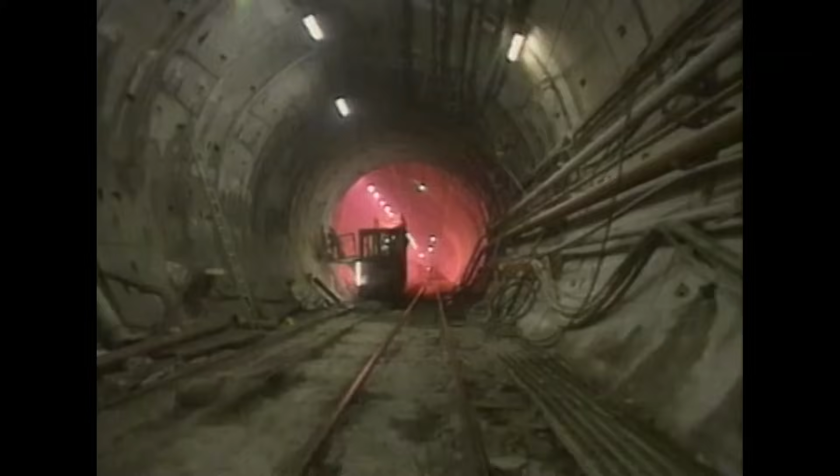Deep beneath the English Channel, one of the most ambitious engineering projects ever attempted is about to begin. Using Earth-eating robotic monsters, 13,000 workers are about to embark upon an epic quest to build the longest undersea railway tunnel in the world. This historic journey will push the limits of technology and human determination to the breaking point. Some workers will not survive. But the creation of the Eurotunnel is a story of triumph, one of this century's greatest superstructures.

Ever since the Ice Age ripped them apart 10,000 years ago, a small finger of ocean, the English Channel, has been the only path between England and Europe. Throughout history, countless lives have been lost trying to cross this treacherous body of water. For centuries, amateur designers and skilled engineers alike have tried and failed to create a safe, permanent link. The first channel tunnel design, if you can call it a design, was in 1802. But at that time, the technology was so limited that really it was science fiction.

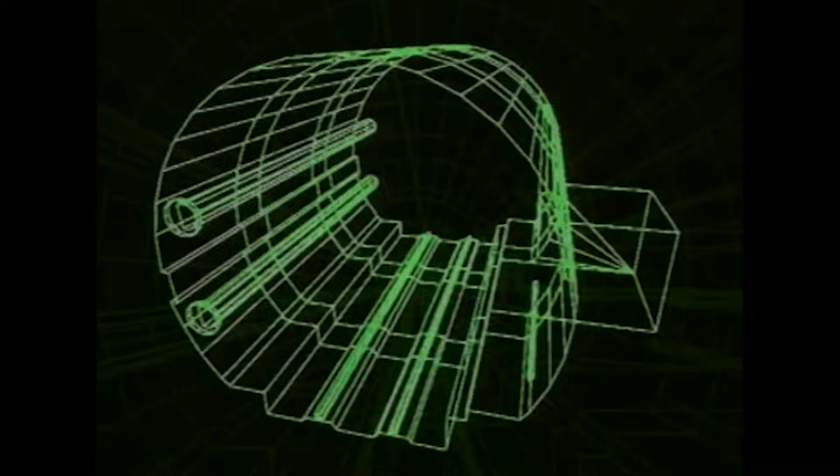But despite the private backing, there was much public opposition, especially on the British side. Some opponents were concerned about the environmental impact of the project, while others didn't want to surrender England's status as a proud island empire. The project's decision-making body, a consortium of 10 companies called Transmanche Link, or TML, is undaunted. They plan a design of 3 parallel tube-like tunnels. When finished, these massive tunnels will form a railway loop between England and France.

Engineers envision a system that will carry thousands of passengers and hundreds of tons of freight each day on this circular 30-minute trip. Of the 35 miles between the French terminal at Calais and the British terminal at Folkestone, 24 will be undersea. No other project has ever attempted to tunnel this far in such a hostile environment. There are lots of problems, technical problems. How will a car move inside the tunnel? What kind of trucks can I transport? You know, all the variety of things.

As the project begins in late 1986, all of these questions remain. But before issues regarding the tunnel's operation can be addressed, the most daunting and obvious problem must first be solved. A machine that can chew through more than 30 miles of solid rock, hundreds of feet below the sea, doesn't exist. It will have to be created.

Thousands of miles from the English Channel, on the outskirts of Seattle, Washington, a solution is being forged of iron and steel. Here at the Robbins Company, a firm specializing in heavy mining and tunneling equipment, the next breed of super machines is being created.

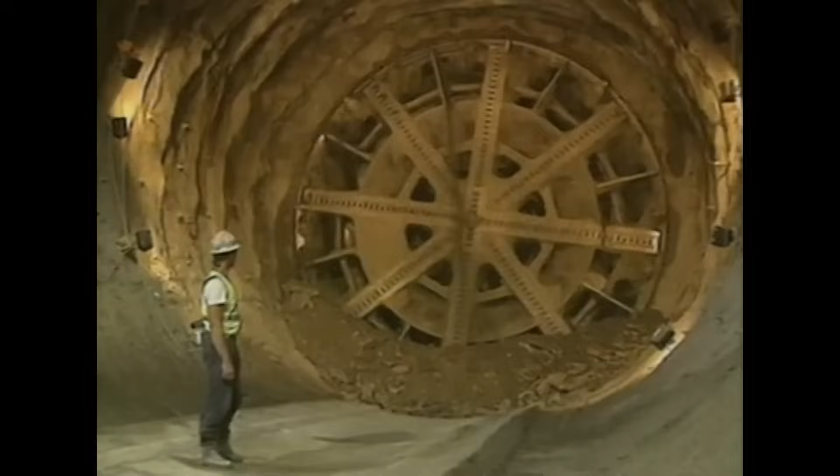When finished, this giant snake-like earth mover will be over 800 feet long and weigh over 1,500 tons. Its rotating head, almost 50 feet in diameter, consists of hundreds of cutting edges made from tungsten carbide, one of the hardest materials known to man. These will be the teeth of this mechanical monster, the cutting force it will use to chew through the earth below the channel.

Pushing the machine forward is a series of powerful hydraulic devices called rams, which will drive the cutting head through the rock. The millions of tons of excess rock it will dig up, called spoil, will be carried out on conveyor belts through the TBM service train attached to the cutting head.

The challenge of carving tunnels through solid rock has always pushed the boundaries of our engineering and manufacturing skill. Even today, it requires a rare balance of brain and brawn.

When large-scale projects like the Los Angeles Aqueduct System were being created in the 1930s, tunneling technology was in its infancy. Today, the Robbins Company will replace blasts of dynamite with a computerized mechanical marvel of which the early pioneers could only dream.

But the danger these modern miners face will also be unparalleled. At its deepest point, the tunnel will be 246 feet below the seabed. During construction, if their boring efforts create a crack in the tunnel or cause a leak, the force of the incoming water will be equivalent to over 7,000 tons of falling weight. Man and machine would be crushed in an instant.

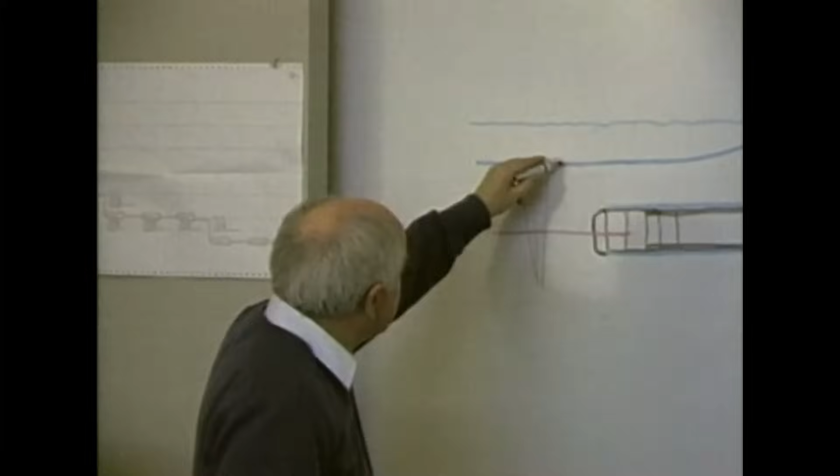At the Robbins Company, frightening scenarios like these must be addressed. Project organizers selected the tunnel's route precisely because it goes through a layer of chalk called marl, which is well suited to their tunneling efforts. It is also the last remnants of the original land bridge that once connected England and France over 10,000 years ago.

While this chalk is ideal for tunneling on the British side, the situation on the French side of the channel is far more treacherous. Here, the seabed is riddled with faults and fissures, conditions that could lead to the deadly accidents engineers must try to prevent.

Of the 11 TBMs that will be created for this mission, the machine that will be used on the French side faces the most difficult job. Working at greater depths, in parts of the seabed that are far less stable than the British side, this undersea giant will have to withstand pressures twice as intense as any tunneling machine has ever experienced.

So engineers decide to create a special TBM that is part boring machine, part submarine. When finished, it will be able to withstand the same amount of undersea pressure as a World War II sub.

Finally, the technology behind the dream of reuniting the European continent seems to be in place. And while the project will ultimately link England and France, the massive construction process will be an international effort. Companies from Germany to Japan will add their technologies to the mix, making the Eurotunnel a truly global undertaking.

While this international force rallies to overcome the physical obstacles of the channel, there are other challenges already mounting, namely the race to complete the tunnel on time and on budget. It is now December 1987. This is where the Eurotunnel begins: 2 huge shafts at Sangatte, France, and Shakespeare Cliff in England.

Too enormous to be delivered to the site as complete machines, the first TBMs are lowered piece by piece into the darkness of the shafts 200 feet below.

Going with them are the workers, the men behind the machines. They too are descending into the unknown, taking the first steps of an epic journey. As the first work begins and the light of day slowly disappears, there is an air of hope, expectation, and much uncertainty.

While extraordinary safety measures have been taken to protect the workers, it remains a dangerous world. And for some, the greatest civil engineering project of the 20th century will carry the ultimate price tag.

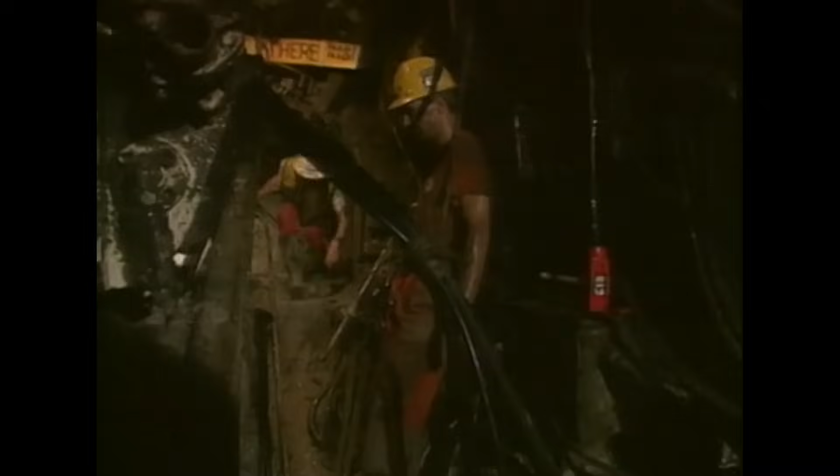A French engineer is trained to make a plan. They can't start work unless they can see what there is to be done, see where their task fits into the whole thing, and see how it's all going to be organized as it goes along. No such thing in the British culture. British culture is to sit down and say, now what have we got to do, chaps? And sort out who's going to do what and set to work.

One of the first problems they face is the assembly of the giant tunnel boring machines, which the workers christen the moles. Even the smallest machine takes months to build and costs several millions of dollars.

The largest of these subterranean titans weighs 1,500 tons. Because of their enormous size and weight, the TBMs must be assembled on site, which in this case is far below the earth. The actual cutting head of the TBM is just the tip of its immense body. Attached to it is the service train, a multi-car train system that carries the hydraulic power to drive the TBMs forward. When connected to the cutting head, each service train is a staggering 850 feet long.

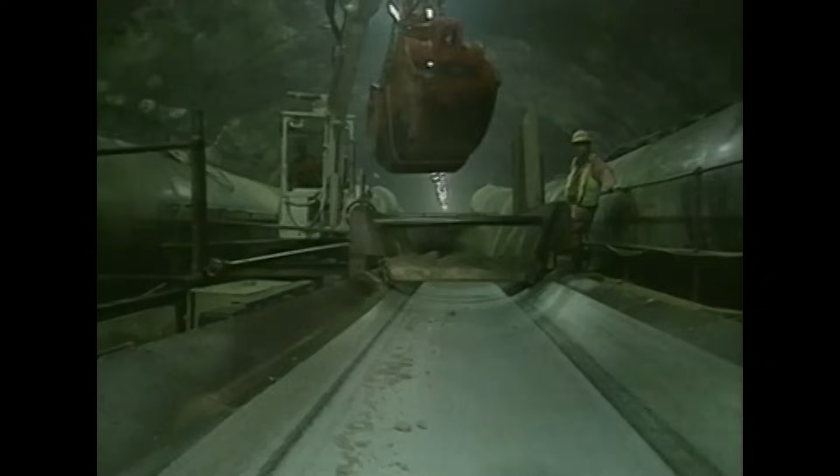One of the service train's main functions is to be a conduit for the removal of millions of tons of rock and sediment these mechanical moles will dig up. The debris will be carried by conveyor belt through the service train to a supply train and back, and finally to disposal facilities in England and France.

The removal of the spoil is a major challenge. When operating at full speed, engineers estimate the TBMs will cut through 750 feet of rock per day, removing 2,400 tons of waste per hour. When the project is finished, the total amount of rock removed would fill a major football stadium 13 times.

But equally important as taking material out of the tunnel is the challenge of getting materials in. One of the most crucial building blocks at this underground work site are the 500,000 concrete slabs which will line the tunnel walls. Because these concrete rings will provide a life-saving barrier between passengers and the churning English Channel above them, their construction is of utmost importance.

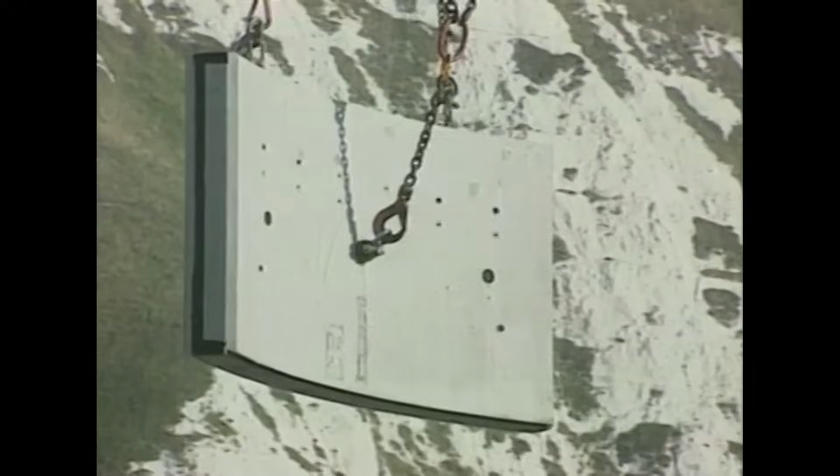Special factories are built in England and France to manufacture these vital sections. Each ring is made of specially reinforced concrete, even stronger than the concrete used in nuclear power plants. It is also reinforced with a framework of steel rods for extra resistance. This is necessary because the savage ocean pressure that will bear down on the tunnel walls is equivalent to 12 atmospheres, or 12 times the pressure we feel on the surface. No human could survive under such immense force.

Once the rings are finished, they are transported by narrow gauge railway to the TBMs in the tunnel and brought up through the service train. Then, a remarkable display of mechanical symmetry takes place.

As the spinning head of the machine claws its way through the rock, operators using giant cranes create the tunnel walls right behind them. After being fitted into place with incredible precision, a gap of only 3/4 of an inch remains between each section. This tiny space is then sealed with a cement grout, and another piece of the tunnel wall is complete. When finished, each ring of the tunnel will weigh 40 tons.

But just as the skeleton of the tunnel is beginning to take shape, the project suddenly seems in danger of falling apart.

It is now 1988. The British and French teams are starting with the middle service tunnel, drilling towards each other to meet in the middle of the channel.

But by May, the giant tunneling machines begin to break down. It was designed to operate at pressures no machine had ever operated before. It was strictly a prototype, so complex that nothing like it had ever been built. It had all kinds of troubles.

Practically everything important on the machine failed or broke at one time or another shortly after we installed it. On the French side, the TBMs are encountering precisely the scenario engineers feared most: hidden faults and fissures in the seabed.

On the other side of these cracks lie the awesome forces of the English Channel. It was technically very difficult because of the water pressure we had to work in, as the machine bored forward right through faults filled with seawater, connected directly to the ocean.

Waterproofing measures designed to protect the TBM's delicate electronic equipment from the seawater fail, stopping the giant machine in its tracks. Then, as engineers scramble to repair the electrical problem, another even larger problem develops.

This is the seal we intend to use. It's a wire brush type seal. The ring of watertight seals providing a life-saving barrier between the TBM and the tunnel walls also begin to fail, again victims of saltwater corrosion.

Engineers need a solution, and fast. The corroded brush-like lining seals are replaced. Then a mixture of paper and special grease is applied to the brushes. When this coating contacts seawater, the paper particles expand and create a permanent, watertight bond between the segments. The TBM is once again waterproof.

But to Robbins Company President Richard Robbins, the tunnel walls seem far more secure than the legal agreement he is working under. Soon he is forced into a desperate personal gamble.

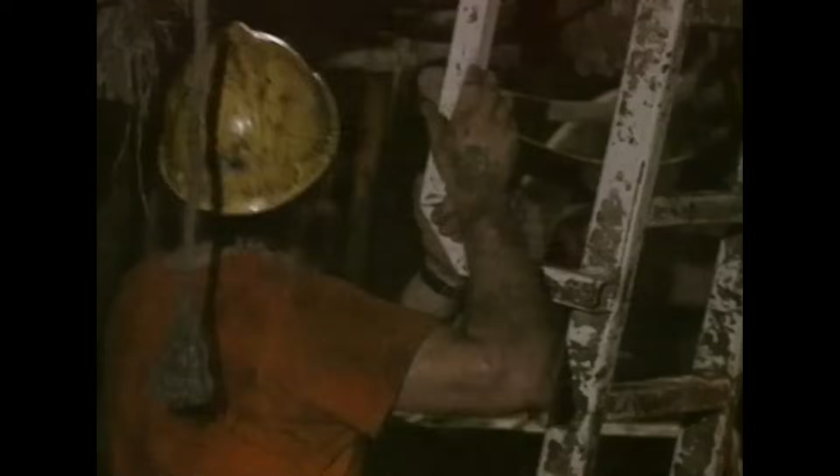The French contractor knew that we had designed a prototype machine, and we didn't really understand exactly what it was going to cost us to build. So he built into the job some interesting incentives: if we met certain project construction points along the tunnel by certain dates, we would earn bonuses.

But it was so bad in the early stages that I was really almost betting the entire company that we would succeed. So it was a big risk for a small company like ours.

But it isn't just contractors like the Robbins Company who are gambling their future. Because the entire project is privately funded, Eurotunnel officials must hit their own deadlines to continue to receive funding. With each new delay, the entire fate of the Eurotunnel lies in the balance.

The one thing we all understood was that if we stopped, it would be very hard to restart. The relationship with the banks, the problems with the contractors, the difficulties with the governments, or just plain organizational difficulties of whatever kind, would very probably bring an end to the project.

Finally, engineers are able to redesign the mechanical flaws in the French TBM and move ahead. But they are now nine months behind schedule. To make up the time, both the British team and the French team must stay on course.

But how will these mole-like machines, tunneling towards each other from opposite directions, maintain such a specific course? They are far too deep below the Earth for high-tech satellite mapping to be of any use. And even the slightest deviation in their course, a fraction of one degree, will mean they fail to meet up under the channel. To remain on track, tunnel engineers use a space-age laser beam guidance system.

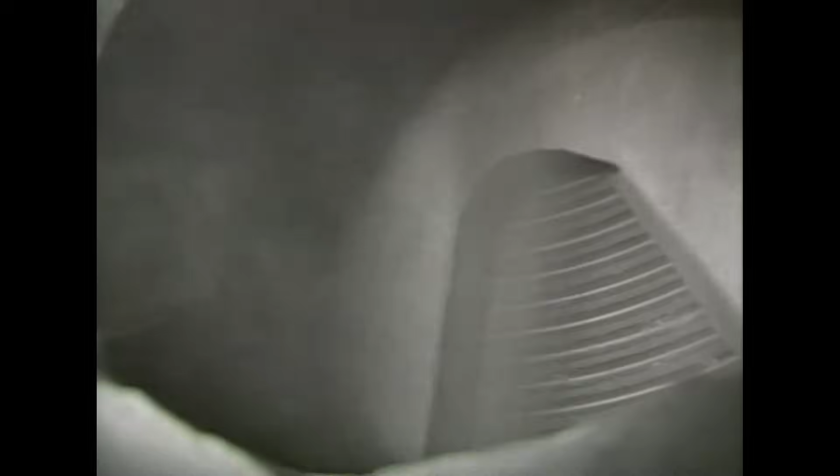At that point, a long steel probe will be sent through to determine if they have been truly on course. If so, more conventional equipment will finish the relatively short distance that remains. But if the two machines are off course, it will mean yet another delay while engineers try and come up with a solution. And with the project's skyrocketing budget under fire, more delays could signal the end of the dream called Eurotunnel.

1989. The year begins on a positive note at the Eurotunnel construction sites. The earlier problems with the French tunnel boring machines seem to be solved. One of the giant TBMs even sets a world tunneling record. For almost 3 years, work on the tunnel has progressed without a fatality.

But in the first days of a new year, a time usually associated with hope and new beginnings, tragedy lies just around the corner. On January 20th, in the dark recesses of this massive cavern, the tunnel claims its first victim. 19-year-old engineer's assistant Andrew McKenna is walking half a mile down the tunnel beside the narrow-gauge railway tracks used by the supply carts. Apparently failing to hear an oncoming train, he is suddenly crushed to death by a locomotive carrying spoil from the site.

Without warning, the stark reality of their dangerous jobs becomes clear to every worker. The tunnel has claimed one of their own. Even with 20th century technology, the job of building tunnels remains extremely hazardous. While workers cope with the loss, they also have to deal with other day-to-day fears brought on by the tunnel.

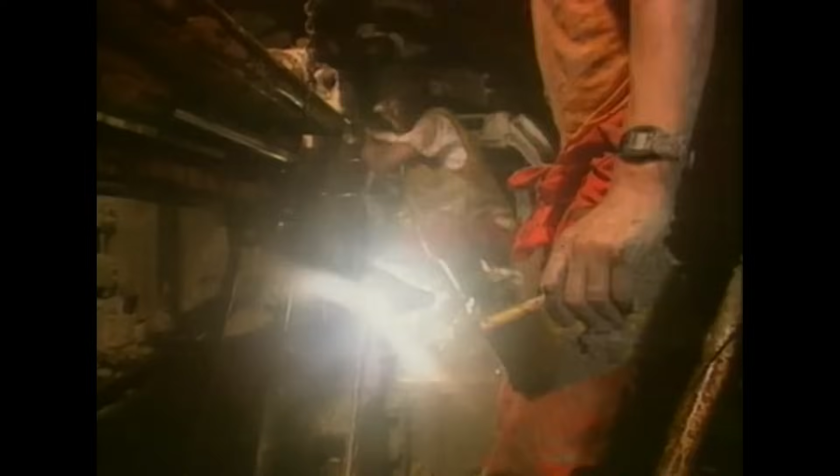Even with the most rigid of safety standards, the death of Andrew McKenna will not be the last tunnel casualty. In all, 12 people will die in this historic and sometimes tragic undertaking. And while the mood of the workers has turned suddenly dark, the tunnel itself remains unchanged. Here, it is always dark. Workers who refer to their machines as moles are left wondering if they are the real underground creatures.

You could be on a day shift where you arrived at work 5 o'clock in the morning and it was pitch black. You could go into a tunnel, work all day in darkness or semi-light, not bright, and then you come out at 5 o'clock at the end of your day and it was dark again. So you could go a whole week without seeing daylight. And that was a very weird experience because it's daytime and yet you never saw it.

As workers move forward in the darkness below ground, above them, work continues on the high-tech trains that will use the system when it's finished. The new service being created exclusively for the Eurotunnel is called Le Shuttle. Tunnel officials say the name is an example of the Anglo-French cooperation that characterizes the project. When finished, Le Shuttle trains will carry passengers in their cars on a continuous loop between the Folkestone terminal in England and the Calais terminal in France.

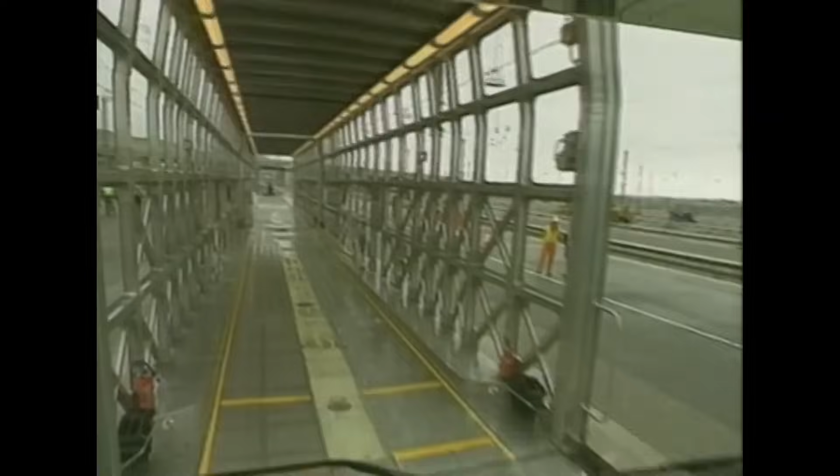Because the transporting of commercial freight will be so important to Eurotunnel's economic success, huge new rail cars are designed to transport heavy trucks. Each freight shuttle, also a service of Le Shuttle, will have 28 carrier wagons like these. Each carrier wagon can accommodate a truck weighing up to 44 tons.

Below the earth, there is no finished railway for any train to travel upon. But that is about to change. It is now October 30th, 1990. There is a new feeling in the air today, a feeling of expectation. After 3 years of tunneling, the British and French TBMs digging the service tunnel, which will run between the two rail tunnels, have arrived at their undersea destination. Facing each other under the English Channel, 100 yards apart, the machines have stopped their digging.

It is strangely quiet. The same question races through each worker's mind. Have they lined up? A probe is sent through. There's a tense silence. Each worker at every level of the project knows it will be a catastrophe if the tunnels are off course. This would be the type of mistake that could fuel the flames of anti-tunnel sentiment into a raging fire. Finally, they get the news. The tunnels line up.

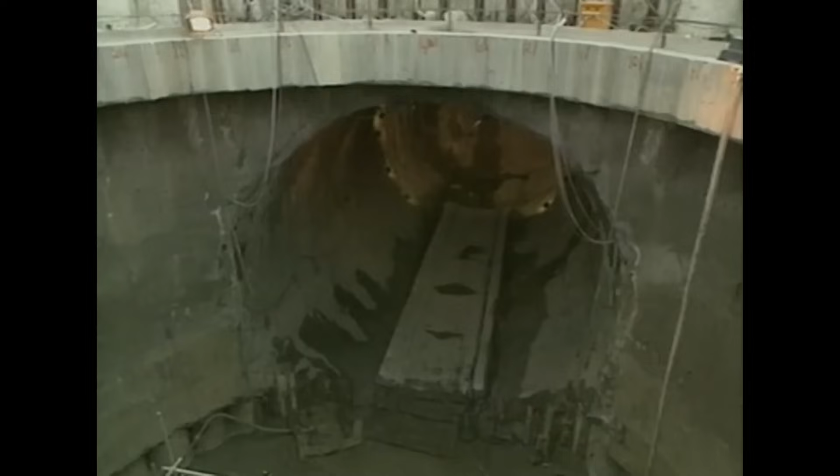As workers return to their jobs with a new sense of accomplishment, a lottery is held to pick one worker from each country to meet in the completed tunnel. Meanwhile, there is the problem of what to do about the last 100 yards. It is too expensive to retrieve both the French and the British machines, so a unique solution is developed. The British aim their machine downward and effectively commit mechanical suicide, burying the high-tech behemoth deep into the earth. This allows the French TBM to move forward and connect with the British side of the tunnel.

December 1st, 1990. Finally, the moment of truth arrives. A thin layer of chalk, essentially a prop for this massive media event, is now all that separates Frenchman Philippe Cozette and Englishman Graham Fagg. With a couple of well-directed jackhammer blasts, a barrier that has stood for 10,000 years is gone. They're through. Hey! There's the handshake we've all been waiting for, Mr. Fagg and Mr. Cozette. One of the most ambitious engineering efforts of the 20th century climaxes with a simple gesture of goodwill. Hundreds of feet below the English Channel, a Frenchman and an Englishman meet through a small hole. For the first time since glaciers ripped them apart thousands of years ago, France and England are once again linked.

The atmosphere was absolutely electric down there. Not only just at the breakthrough, but afterwards. And people were moving. We all felt European. I don't think anybody felt English or French. We were all European at the instant and for the brief hour before we could actually set off back to our respective sides. Amazing scene. Really wouldn't have missed it for anything.

The next few months will hold many more extraordinary moments. The public gets their chance to share in history with the above-ground breakthroughs. First in France, and then in England. When that tunnel broke through, there was a party that would end all parties. It practically went all night. It was at the Windsor Castle on the British side. Fireworks and feasting and about 1,000 guests, and it was really a marvelous party.

What I remember is sitting down there having the feeling there is no more machinery running now. And a feeling, in amongst the most tremendous uproar, popping champagne corks and backslapping and cheering and so on, a feeling of absolute silence, which is the most extraordinary feeling. But amidst the revelry and the silence, the realization begins to sink in that there is still a long way to go. 2 more tunnels need to be created, not to mention the installation of the high-speed railway. Work on the Eurotunnel is far from over.

As the parties celebrating the breakthrough of the service tunnel fade away, efforts to complete the 2 remaining tunnels resume at an energetic pace. The 2 main rail tunnels are called running tunnels. To allow trains to switch from one track to another, massive crossover caverns are carved from the seabed. 40 feet high and over 500 feet long, they are the largest undersea caverns ever created.

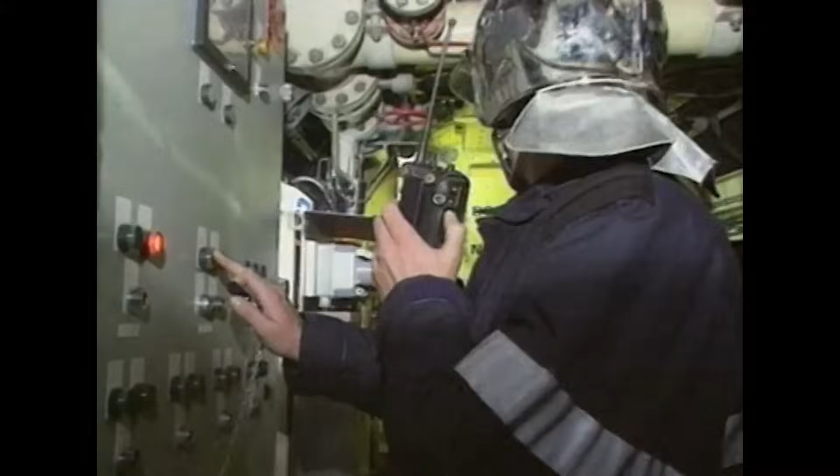But fire isn't the only emergency tunnel officials must prepare for. Terrorist attacks, bomb threats, and even the remote possibility of an earthquake are all scenarios which must be planned for. The evacuation train will be with us in approximately 6 minutes' time. Specially trained security force and evacuation teams are established that constantly rehearse emergency procedures.

While they speak the same language in times of emergency, French and British officials still have different beliefs regarding issues of safety. There are 2 different safety philosophies. The French have a belief in intelligent operators using sophisticated equipment, but in charge of the equipment. The British have a culture of fail-safe computers.

Channel Tunnel, you've got an aggregation of both, so you can be quite sure whichever you think is better, the tunnel's got it. No other tunnel in the world is as safe as this one, with the central service tunnel, the fire supply systems, duplication of power supplies, emergency walkways, and all the procedures that have been put in place to cover every eventuality. But there is one eventuality engineers haven't planned for.

As engineers perform test runs in the tunnels, the friction of the trains is producing an enormous amount of heat, raising temperatures to a scorching 140 degrees Fahrenheit. Scrambling for a solution, engineers create a pipeline filled with chilled, flowing water to keep the heat in the tunnel from accumulating. This cold water acts like a sponge to absorb the tunnel's heat. The water, now very warm, is then pumped to a cooling station on shore, re-chilled, and recirculated once again.

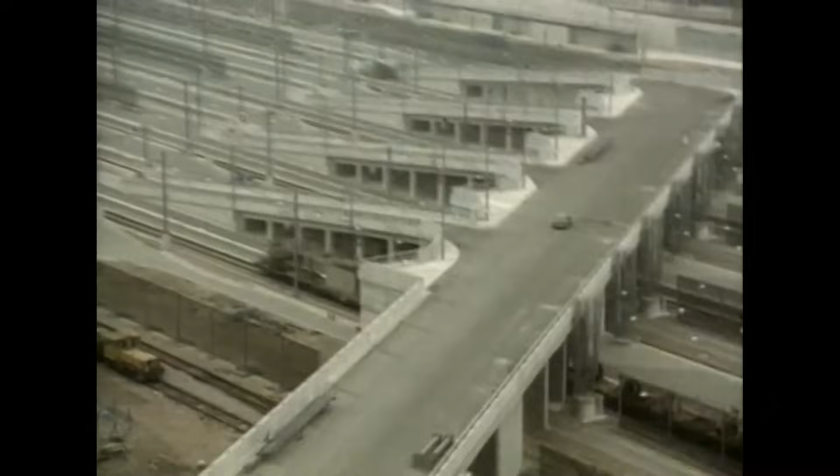Elsewhere, the 2 stations that will serve as Eurotunnel's passenger hubs are beginning to take shape. The massive French terminal at Calais is one of the largest construction projects in the world. Within its sprawling 11-mile perimeter, the Calais station will have 30 miles of roadway and 30 miles of railway track. While the British terminal at Folkestone is tiny in comparison, 5 times smaller than the French station, it will house the nerve center of the entire Eurotunnel system.

Press passage door 5650. You'll press the opening.

Stand by, please. Here in the Folkestone Command Center, operators use state-of-the-art technology to control all of the rail traffic that moves through the tunnel. Sitting behind 3 rows of desks, they can survey a curved wall showing the status of the entire system. This high-tech display is called a mimic board. It shows the position of every train in the tunnel and at the terminals. Door clear, opening now. In the event of a power failure, tunnel control will immediately switch over to the Calais Control Center, which is staffed at all times in case of emergency.

Even the drivers of the shuttle trains will receive a little high-tech help. In this driving simulator, operators practice navigating through the tunnel. In real life, the driver of each shuttle will sit in the front locomotive, while the captain of the train sits in the rear locomotive. The captain, who is ultimately responsible for the safety of the passengers, communicates with the driver by intercom. But the onboard computers also have command status. If the train begins to move too fast, the shuttle brakes will go on automatically.

This is the tunnel that will carry passengers from Britain to France, but today it is a symbol of a united Europe. Just over a month later, on June 28, 1991, more celebrations as a huge crowd gathers for the completion of the Southern Tunnel. The last TBM punches through the remaining wall and comes to a stop.

4 years after the digging began, one of the most difficult engineering challenges in history is now complete. While workers celebrate and drink champagne, the machines finally fall silent. In the long, colorful history of these two countries, this is a singular moment. French or British, project chairman or supply cart driver, for a moment, it doesn't matter.

What is being created here and what has been achieved to date is of enormous value for the future of both our countries and of Europe. Thank you.

In all, over 13,000 workers have labored for more than 6 years. Besides the 3 main undersea tunnels, each over 30 miles long, 9 other smaller access tunnels were also created. The amount of material removed on the British side increased Her Majesty's kingdom by 75 acres. Engineers believe the hard part is over. In fact, contractors like Richard Robbins collect bonuses for finishing ahead of schedule.

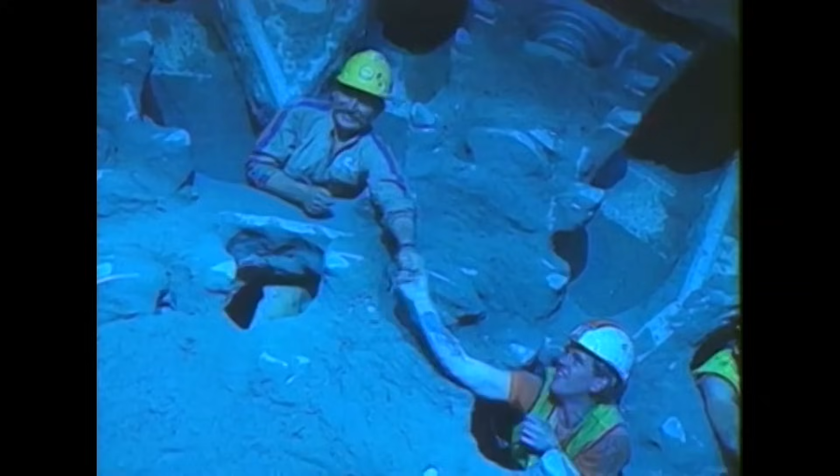But when today's party is over, tomorrow morning will usher in the stark reality of a bloated budget and an uncertain future. To Eurotunnel officials, the hard part may have just begun. With the digging of the Southern Railway Tunnel finished, the 7-year struggle to build the world's longest undersea tunnel nears completion.

The narrow-gauge railway tracks which carried supplies into the tunnels are replaced by a new concrete floor. This will support the wider, standard-gauge railway tracks on which high-speed trains will travel at 100 miles per hour. Over 300,000 rubber shock absorbers are installed to secure 60 miles of track. The powerful locomotives that will pull trains half a mile long 20 times a day are delivered to the terminal at Calais, France. Finally, on May 6, 1994, the grand experiment is about to begin.

After boarding one of the luxury Eurostar trains in London, Her Majesty Queen Elizabeth II arrives in Calais, France. This will be just the first part of an all-day celebration scheduled in both countries. Her Majesty is received by French President François Mitterrand. After a ribbon-cutting ceremony, the Queen and the French President depart in Her Majesty's Rolls-Royce to travel on the shuttle back to England.

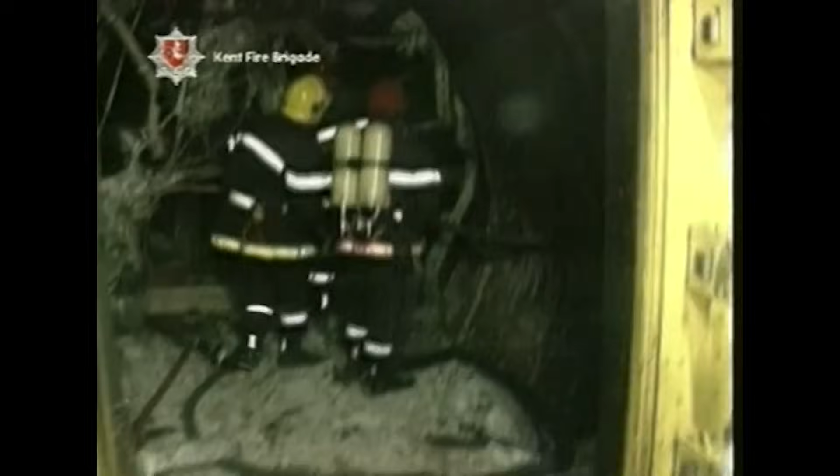1,500 feet of railroad track and 150 feet of the tunnel's concrete lining are wrecked and need to be replaced. The damage caused by this accident, estimated at almost $100 million, makes it one of the costliest rail accidents in history. While no one was seriously injured, public confidence in the tunnel plummets. Eurotunnel officials go on the defensive.

12 hours later, nobody was in hospital. Yet there'd been a 1,500 degree centigrade fire 300 feet away from them. Nobody was in hospital. Now say that about a highway crash, or about a ferry sinking, or about a plane crash. You can't.

17 days later, Eurotunnel officials stage an emergency evacuation exercise designed to reassure the public the tunnel is safe. A drill critics say has more to do with public relations than public safety. Despite this disaster, the northern tunnel reopens to passenger traffic several weeks later. But the badly burned section of the southern rail tunnel is closed for 6 months while the damaged tracks are repaired. Finally, commercial freight traffic resumes on June 15th, almost 7 months after the accident.

As this disaster fades from the headlines, memories of the accident slowly fade with it. But what hasn't gone away is the sacrifice made by over 13,000 men and women who created this architectural marvel. This plaque at England's Shakespeare Cliff pays tribute to the 12 workers who lost their lives working to create the Eurotunnel. Theirs was the ultimate sacrifice.

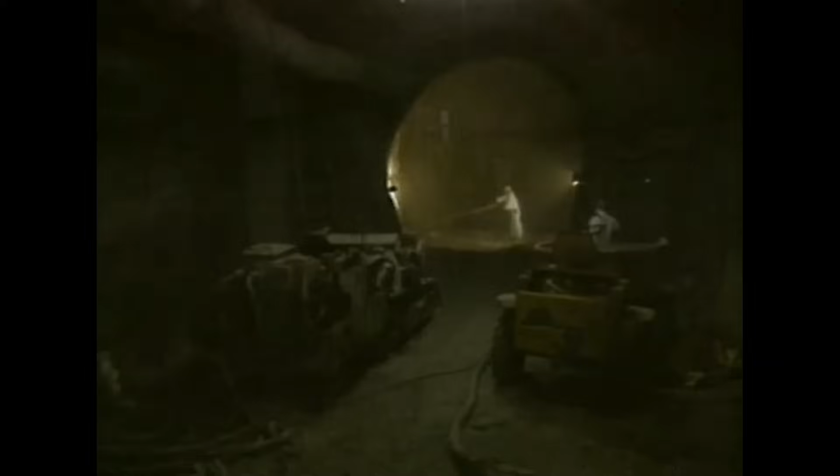The job of being a tunneler, of staring at a mountain or ocean and seeing a way to cross it, has always required a special type of person. A person who can exist without natural light, in suffocating holes, working for long periods of time towards a seemingly impossible goal.

Tunnelers are a special breed of people. They move around the world building holes in the ground. And most of their work is never seen by anybody else, but they do take a pride in building a good tunnel. It remains to be seen whether or not the Eurotunnel will be a financial success.

But officials say immediate financial return was not the sole concern of every investor. The philosophy of the investors was not, curiously, mostly financial. They said it doesn't matter whether we don't see any return. We think the benefits for our children, our grandchildren, are going to be extremely important.

The Folkestone Terminal in England and the Calais Terminal in France are now ports of call to thousands of travelers. This undersea journey, for centuries the subject of scorn and ridicule, now seems routine, the shortest distance between 2 points.

If you were British and you lived here, we're an island, and if you want to get off this island, in the past, the only way is either to get on a boat or to fly. And for the first time ever now, you can take a train. You don't have to change, you don't have to get off. You get on the train in central London, and you get off, and you're suddenly in central Paris, and it's a whole new culture.

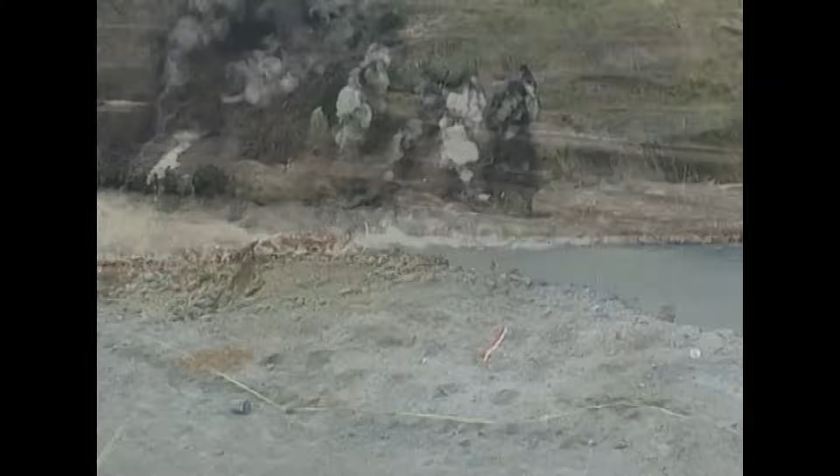Deep in the jungles of Central America, man has battled nature to build an engineering marvel. Its epic story continues to astonish us. Its dimensions defy imagination. Its price, thousands of lives. It's the crossroads of the world's economy. To protect it, America has gone to war. It's the superstructure called the Panama Canal.

December 20th, 1989. Under cover of darkness, 20,000 American troops invade the tiny Central American nation of Panama. As gunfire shatters the stillness of the night, the invaders pursue their prey. General Manuel Noriega, Panama's ruthless dictator and a suspected drug trafficker.

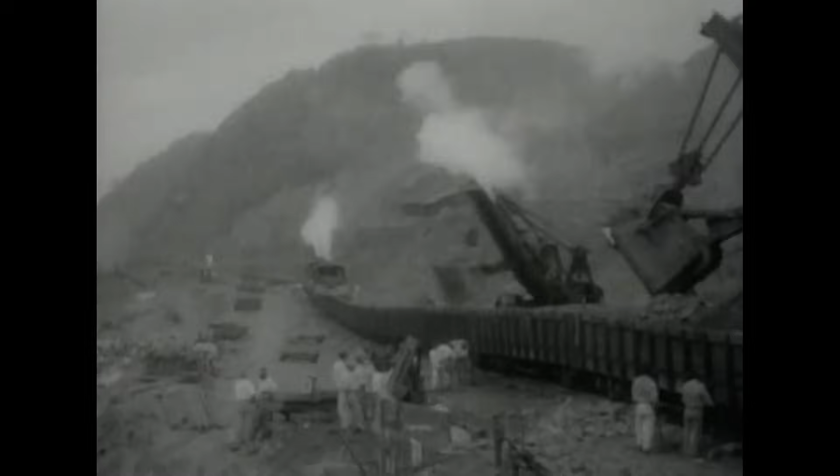The canal was born of a fierce struggle between man and nature, a battle that began at the dawn of the 20th century, when America's greatest engineers took on the biggest challenge of their lives and astonished the world. From 1904 to 1914, 40,000 workers dug and blasted their way through some of the toughest terrain on planet Earth. They dug the deepest ditch, built the largest dam, poured the biggest concrete structures the world had ever seen.

They gave their sweat and they gave their blood. Thousands gave their lives.

The Panama Canal links the Atlantic and Pacific Oceans at the Isthmus of Panama, a mere 50 miles wide, the narrowest point between North and South America.

When a ship enters the canal from the Pacific Ocean, two sets of locks raise it 85 feet above sea level. At this elevation, the ship sails 9 miles through a man-made channel carved from the mountains of the Continental Divide.

Then 23 more miles across the second largest man-made lake on Earth. As it nears the Atlantic, another set of locks lowers it to sea level. By sailing through the Panama Canal, a ship saves nearly 30 days, the time it takes to sail around the tip of South America.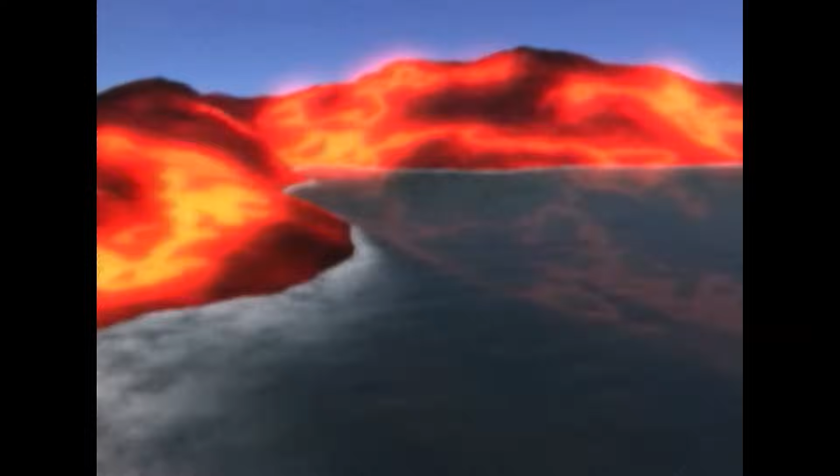Yet 5 million years ago, there was no need for a Panama Canal. The Atlantic and Pacific Oceans freely flowed between North and South America. Then, about 3 million years ago, the ocean floor erupted. 50 miles of volcanic rock arose between the seas. The Isthmus of Panama was born.

Eons later, men dreamed of reopening the ancient path between the oceans. Digging 50 miles seemed seductively easy. But in Panama, it wasn't.

The Isthmus of Panama was one of the most difficult sites to dig a canal in the world. It was geologically unstable, with mountainsides that tended to slip. It was seismically active, and it still is. It has a huge, almost impenetrable jungle covering it, and enormously jumbled varieties of stone and terrain.

At the end of the 19th century, men learned just how formidable a foe the Isthmus of Panama could be. In 1881, France undertook the world's first attempt to dig a Panama Canal.

Confidence was high, and with good reason. In charge was one of the greatest entrepreneurs of his age, Ferdinand de Lesseps. It was de Lesseps who, in 1869, had accomplished one of the most impressive engineering feats of all time: excavating the Suez Canal across Egypt, joining the Mediterranean with the Red Sea.

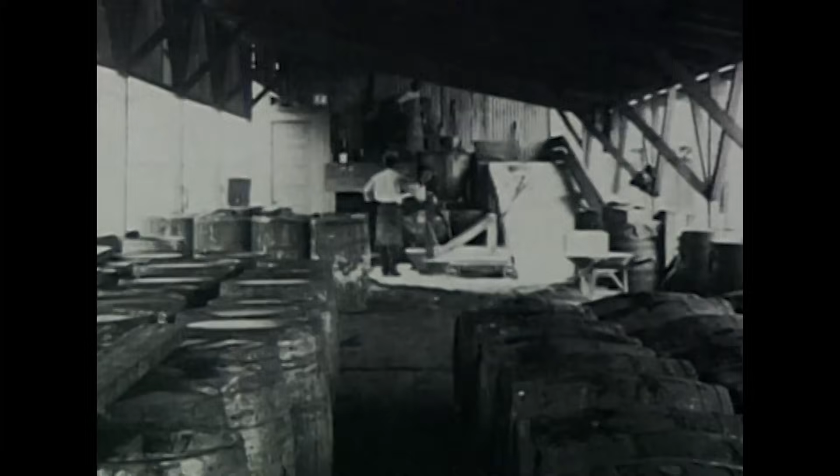In Panama, Gorgas assembled his weapons: 3,000 garbage cans, 4,000 buckets, 1,000 brooms, 5,000 pounds of soap, and 120 tons of insecticide. He sent battalions of workers into the streets, swamps, and jungles of Panama with orders to hit the mosquitoes wherever they lived.

Draining puddles and other mosquito breeding grounds, Gorgas's army sprayed thousands of gallons of oil across ponds and swamps, killing the insect's larvae.

Fumigating entire towns again and again, the cleanup took a year and a half, but by Christmas 1906, yellow fever and malaria had been virtually eliminated. To this day, the Canal Zone remains the most disease-free strip of tropical landscape on Earth.

William C. Gorgas would only be the first of many brilliant men to tackle the challenge of building the Panama Canal. It would be a task that would test the limits of each man's considerable abilities, for even without mosquitoes, Panama remained a formidable geological challenge. To dig their canal, American engineers mounted the biggest and most expensive peacetime endeavor in history. Again and again, they confronted seemingly insurmountable difficulties, inventing new and ingenious ways to overcome them.

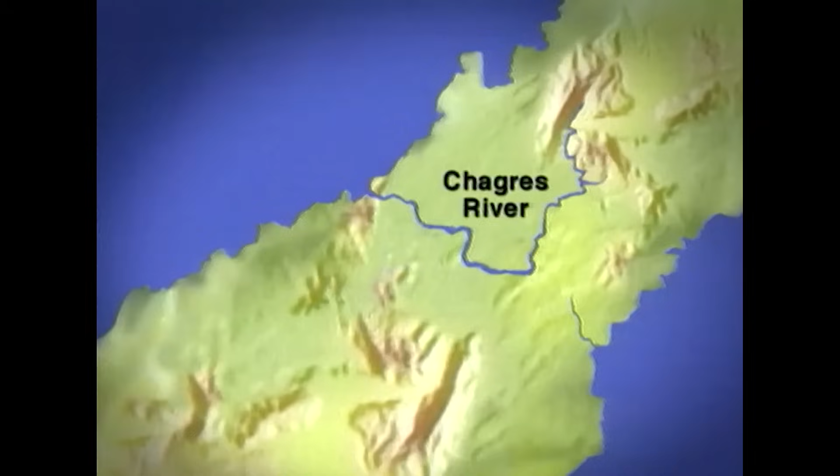When the Americans began their canal in 1904, engineers laid out an ambitious master plan that would take 10 years to complete. That plan called for building 3 gigantic sets of locks, one on the Atlantic and 2 on the Pacific. To supply the canal with its water, engineers would need to dam the Chagres, the largest river in central Panama.

The lake created by the dam would make it unnecessary to dig a canal all the way across Panama, because ships could sail some 23 miles across the lake. But between the lake and the Pacific locks, Panama's rugged backbone would have to be tackled with shovel and pick.

This was the Continental Divide, an unbroken chain of mountains stretching from the Rockies in North America to the Andes in the south. Here, the canal builders would face their first challenge: digging a ditch 9 miles long, 300 feet wide, and 350 feet deep. It would not be easy.

The French had tried to pierce this formidable barrier and failed. The problem was that you didn't have stable hillsides. They looked like rock, but they were so badly fissured and layered in this direction that they kept on slipping. Every time you'd cut something, it's like digging a foundation for a house in mud.

To battle the Continental Divide, America sent an unlikely champion. His name was John Stevens. Stevens had never built a canal. He was a railroad man, famous for laying track and blasting tunnels where no one else could. When he arrived in Panama in 1905, he was 52 years old and had built over 1,000 miles of railroad in the United States, as much as any man alive.

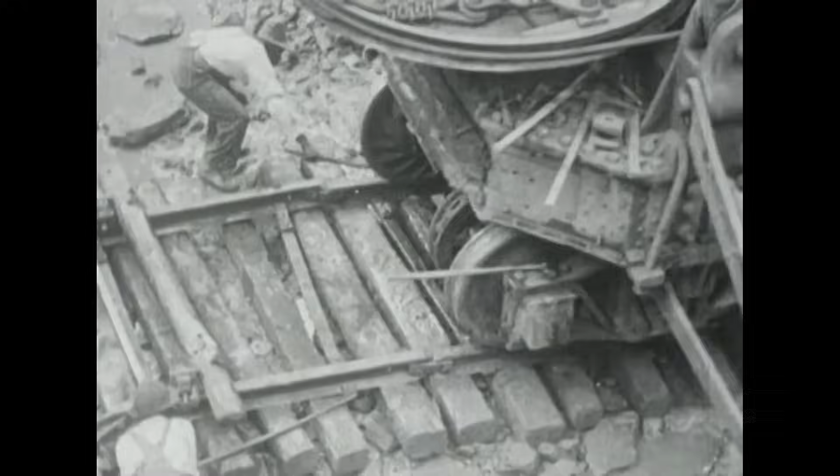John Stevens invented a new device called the track shifter. This simple but effective machine allowed the railroad to follow the digging wherever it went. What he did was design a crane that moved along the track itself, leaning forward and picking up the track in front of it, lifting it, and moving it a couple of feet to the side, then moving along and doing the same thing a little bit further on, and on and on.

But John Stevens didn't stay to execute his brilliant plan of attack. As soon as he had organized the canal excavations, the headstrong railroader abruptly quit. He basically said that the difficult work was in the organization and the design, and that the construction itself was no big deal. Once it became nothing more than just a big construction project, he went elsewhere, off to Russia to find new challenges.

Stevens' departure infuriated President Theodore Roosevelt. The president turned the job of digging the canal over to Army Colonel George W. Goethals. Said Roosevelt, "He can't quit unless I order him to." Second in his class at West Point, Goethals had distinguished himself in the Army Corps of Engineers.

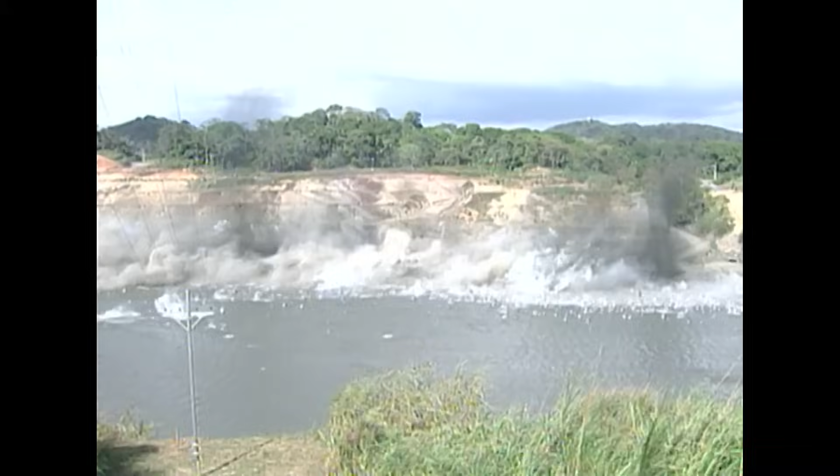But the battle between man and the isthmus continues to this day. Today's canal engineers have new weapons in their war against the ever-shifting earth. Using satellites and global positioning systems, they track earth movements with pinpoint precision. But predicting landslides is not the same as preventing them. Engineers doubt that their battle with Panama will ever end.

Nature has thrown many obstacles in the canal's path. Culebra Cut was only the first. Conquering these challenges would make engineering history.

When American engineers began digging in Panama, they had to decide whether to build a sea level or a lock canal. Because it gets its water from the ocean, a sea level canal must be as deep as sea level. But in the mountains of Panama, sea level is over 500 feet deep. So the Americans rejected the French idea of digging to sea level. They planned to use locks to raise ships 85 feet above the sea.

But building a lock canal created a new problem to be solved. Engineers would have to design and build locks capable of raising ships 85 feet. No canal had ever lifted ships that high.

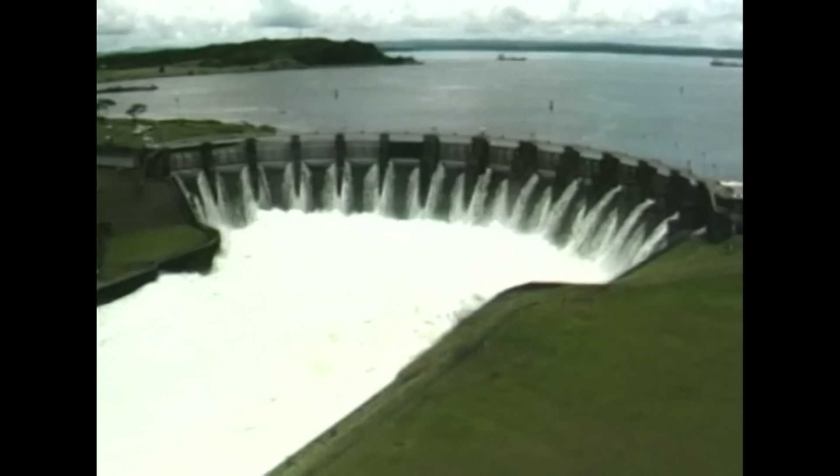Because Gatun Lake is 85 feet above sea level, the force of gravity propels its water downhill toward the sea. But the canal's three sets of locks, Gatun locks on the Atlantic, Pedro Miguel and Miraflores on the Pacific, act like plugs in a gigantic bathtub, preventing the lake's trillions of gallons of water from reaching sea level. To raise and lower vessels, the lock operators need only to open and close a series of valves. Water seeking sea level flows into or out of the chambers, raising or lowering ships as it goes. It takes 26 million gallons of water to raise one ship, and another 26 million to lower it. Enough water to meet the needs of a large city for 2 days.

To handle this enormous amount of water and accommodate the biggest ships afloat, canal engineers would design the largest concrete structures of their time, so massive that no one was sure they could be built. The Panama Canal's locks are so well designed that today's enormous ships can still travel safely through them with only inches to spare. Before any ship ventures into a lock, canal workers tether it to 4 electric locomotives called mules, which travel on either side of the lock on a high-voltage rail. As the ship moves through the lock, a canal pilot on board tells the mule drivers when to reel in or let out cable. Like fishermen playing an enormous marlin, the locomotives keep the ship from hitting the lock walls.

To accommodate the Titanic, the lock chambers would have to be the largest concrete structures in history, each one 110 feet wide and 81 feet tall, higher than a 6-story building. Even today, if stood on its end, a single lock would be the 4th tallest structure on the Manhattan skyline, topped only by the Empire State and Chrysler buildings and the World Trade Center. Only when the locks are drained for repairs can we appreciate their awesome dimensions and understand why those who witnessed their construction compared them to great cathedrals.

Never had concrete been poured on such a massive scale. No one was absolutely sure that it could. The problem with casting concrete in massive amounts is that concrete is an exothermic material. In other words, it gives off heat as it hardens. So the hotter it gets, the more danger there is for the material to crack. And the more volume you have, the more dangerous it gets for things to crack too.

There were other problems. Engineers were unsure exactly what mixture of gravel, sand, and water made for the strongest concrete. If they poured it too late after mixing, it would set improperly. Most difficult of all, building with concrete meant every detail of the lock had to be pre-formed in huge wood and metal molds. The lock chambers would have to be cast like enormous concrete pottery.

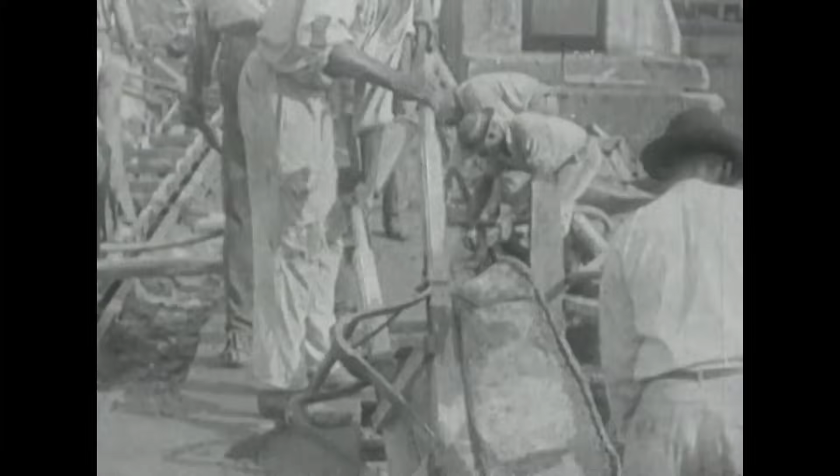To succeed, the canal builders had to do something never done before: pour millions of cubic yards of concrete with absolute precision and perfect timing. It seemed impossible. But for the men who built the Panama Canal, impossible was not an option.

Engineers stretched steel cable between giant movable towers. From the cable hung enormous buckets, each holding 6 tons of freshly mixed concrete. The towers traveled back and forth over the building site, pouring concrete as they went.

The cable cranes were made of 2 very large towers mounted on tracks that could travel along the axis of the Panama Canal. They transported the dirt away, they transported the concrete in. They were very flexible because they could move in 3 dimensions. They could move along the canal axis and across the canal at the same time.

In 2 years using this system, the canal builders poured 4.5 million cubic yards of concrete, a volume equal to building a solid wall 8 feet thick, 12 feet high, and nearly 300 miles long. Today, computers control concrete pouring, but we still build huge concrete structures with the techniques and equipment invented for the Panama Canal. The lock designers topped their concrete pouring triumph with yet another dazzling innovation.

In the age of nuclear power, it's hard to imagine how electricity could have amazed our great-grandparents. But at the beginning of the 20th century, it was the cutting edge of energy technology. Electricity was a brand new energy form. Edison had built the first electric generating plant in 1882, and this was just about 20 to 30 years after that. I don't think that electricity had been used on a building site in quite that extent before.

Unlike steam power, electricity was instant and precise. With a touch of a button, it turned on or off. In the blinking of an eye, it traveled through long wires to start compact motors that drove immense machines. Huge turbines turned by the force of the Chagres River powered 1,500 electric motors which ran the locks of the Panama Canal. An industrial world that ran on steam and animal muscle was deeply impressed. The Panama Canal showed what the new electric power could do.

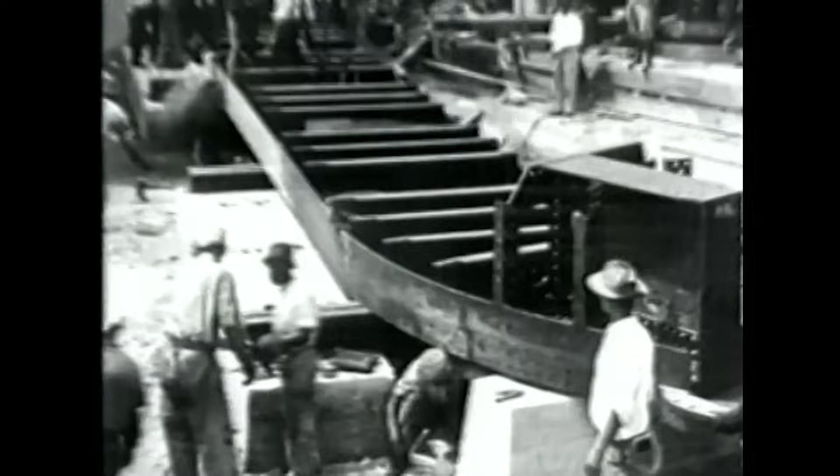With concrete poured and electricity in place, only one challenge remained for the lock builders: the chamber gates. These gates had to be strong enough to hold back millions of gallons of water. To fit the world's largest lock chambers, they had to be the biggest lock gates ever built, as tall as 6-story buildings. To remain watertight, the gates needed to open and close with flawless precision. In short, they had to be engineering miracles. Massively strong, yet light as feathers. And they were.

On dry land, each lock gate weighs 700 tons. In water, it floats. The buoyant hollow frame makes the gate lighter than water. This is a very important feature of the design of the lock gates, because this means that the machinery that is necessary to open and close them doesn't have to move a very heavy, massive steel gate, but really only has to move something that is buoyant in the water.

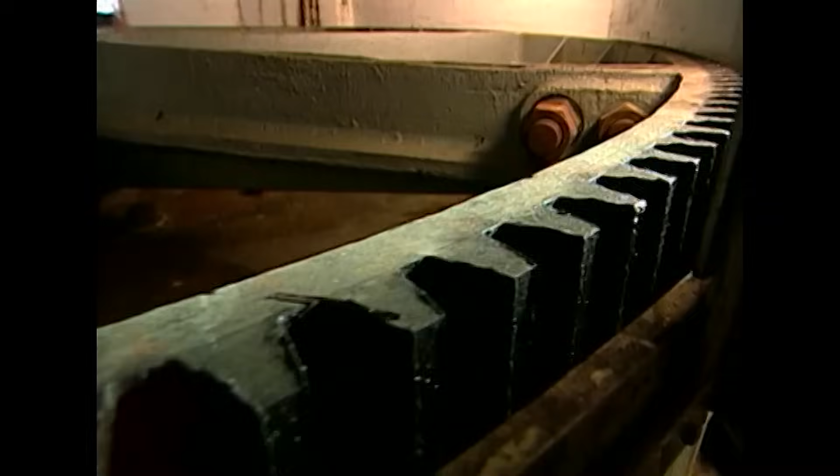Massive steel rods open and close each gate. Moving the rods are huge gear wheels, 20 feet in diameter. Yet incredibly, the whole system runs on a single 40-horsepower electric motor, no more powerful than a motorcycle engine. When the gates were finished, engineers tried opening and closing them in the dry lock chambers at their full weight. One observer noted that each 2 million pound gate swung as easily as an ordinary door.

Gravity was the heart of the locks. Electricity was their nervous system. Engineers gave them a brain, the control board. Today, the original control boards built in 1913 still run the locks. Each board is a tabletop model of the entire lock operation. But unlike a real brain, it cannot make mistakes. As lock operators turn its valve handles, letting water in and out of chambers, opening and closing gates, the entire lock operation unfolds in miniature before their eyes. Everything must happen in correct sequence.

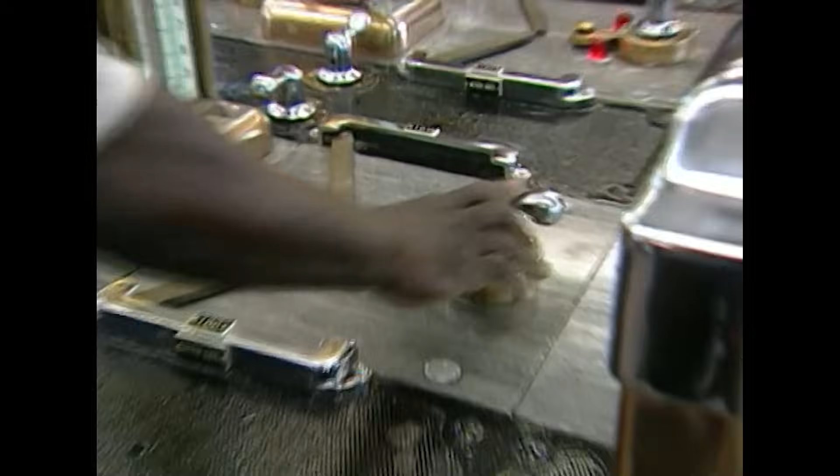Beneath the board, controls are ingeniously interconnected. No one can throw a switch or turn a valve out of order. If they do, the lock operation stops. The lock system had a whole series of fail-safe devices.

It was more like the organization of a military campaign, where each module fit exactly into another organizational module until the whole thing could work. If any piece were left out, if any step were left out in the organization of how to open and shut these gates, how to move ships through the canal, it wouldn't work, it would shut down.

After 4 years of construction, the locks were finished. By then, the Panama Canal was finally nearing completion. In May 1913, 2 steam shovels met nose to nose in Culebra Cut and excavated the last few buckets of soil. The canal was finished. All it needed was water.

On October 10th in Washington, D.C., President Woodrow Wilson pressed a button, setting off an explosion 3,000 miles away in Panama. Hundreds of dynamite charges blew the final yards of earth sky high. Water from Gatun Lake rushed into the Culebra Cut.

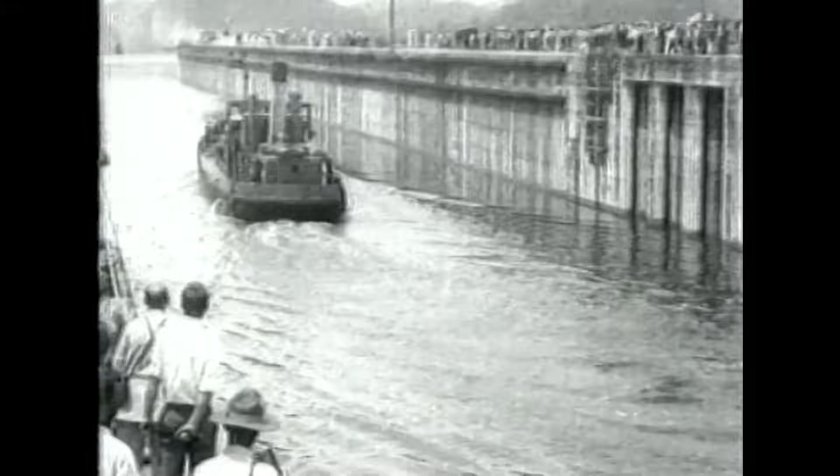But the Panama Canal had been dug as much for strategic military purposes as for commercial shipping reasons. Once finished, it would become one of America's key military assets and one of its most vulnerable targets. On August 15, 1914, the SS Ancon was the first ship to pass through the Panama Canal. A dream hundreds of years old had come to pass, 6 months ahead of schedule and 4% under budget.

But it was a dream with a staggering price. In 10 years, the United States spent $352 million to build the Panama Canal, 5 times more than America had spent on the Louisiana Purchase and all other territorial acquisitions combined. The cost in human lives was no less cheap. More than 5,000 American deaths, nearly 25,000 French. 500 lives lost for every mile.

The canal builders had carried out one of history's greatest construction projects and could only wonder if their accomplishment would stand the test of time. They could not know that within 30 years, the Panama Canal would face a deadly peril. At the end of World War II, the crew of an American warship in the Pacific were astonished to see what appeared to be a prehistoric monster rising from the deep. In fact, it was a Japanese submarine, 400 feet long, the largest underwater vessel of its time.

Examining the subs, American sailors discovered a strange tube and a long metal track. The Japanese explained that the tube was actually an airplane hangar, ingeniously designed to hold seaplanes called Seirans. Like aeronautical origami, the Seirans literally folded into their tubular homes. Once on the surface, the subs would launch their planes by catapulting them off their decks.

But in the early days of the war, aware of the canal's vulnerability, the U.S. military put into action a secret plan of its own. 100 feet under the locks, a maze of tunnels led to Special Items Project 7, SIP-7 for short. SIP-7 was two enormous hydraulic jacks, each weighing 100 tons, supporting a massive slab of steel hidden underground.

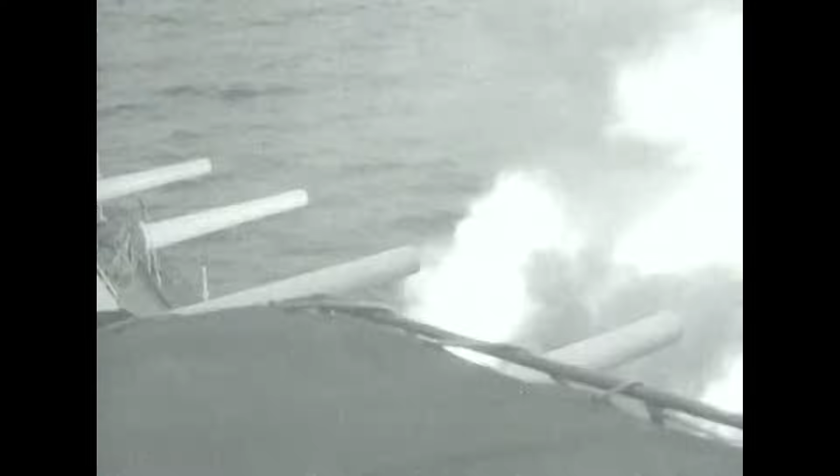This film offers a rare glimpse of SIP-7 in action. Pushed upward by the underground jacks, the huge steel dam rises in a lock, capable of holding back millions of gallons of water if bombs ever shattered the lock gates. World War II ended before Japan could launch its attack against the Panama Canal. Instead, its giant subs ended up as target practice for the U.S. Navy.

Today, the National Air and Space Museum in Washington, D.C. is restoring the last of the Panama Canal bombers. The Seiran aircraft are the only submarine-based airplanes ever designed and put in operation that were intended as an offensive weapon. The Seiran that we have here in this museum is the only one left in the world of this weapon system. And we're very proud to have this because of the threat that it did show against the Panama Canal and what could have been done.

At the close of the 20th century, much has changed at the Panama Canal. The technology of the future works side by side with the innovations of the past.

What's the ship doing? He's going to hit us. Oh, nothing we can do here, Captain. We'll do it.

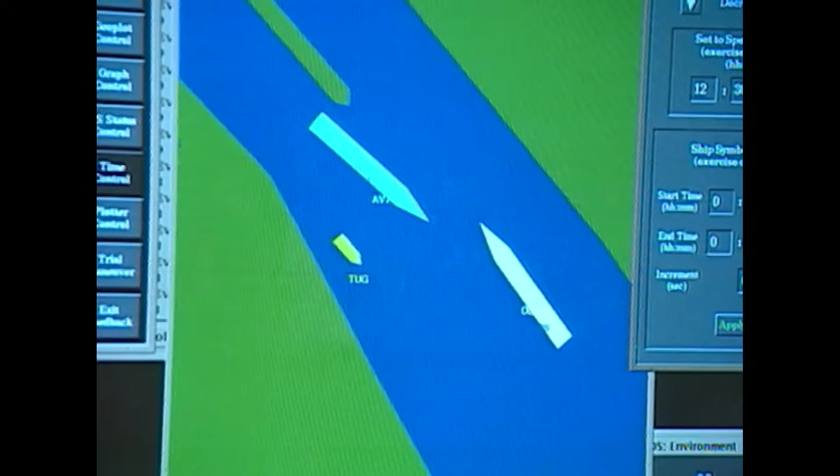Veteran canal pilots use state-of-the-art computer simulations to teach trainees how to avoid catastrophe. It's very important because you have to keep in mind the hydrodynamic effects, the interaction between the two ships. Today, the biggest ships using the canal are called Panamax vessels. Panamax ships are over 950 feet long and over 100 feet wide. The lock chambers are 1,000 feet long and 110 feet wide. There's literally no room for error.

You do a good job entering the locks, and you can see the face of the master right away with a big smile. And if you don't, then you see him looking the other way, and that's perhaps your biggest punishment.

The world is changing too, beyond anything the canal builders could have imagined. The largest of today's supertankers and aircraft carriers are too big for the locks. There's talk of building high-speed railroads across Central America to compete with the canal. But as the year 2000 approaches and the canal passes from American to Panamanian ownership, this superstructure that once astonished the world continues to serve it well.

Since the canal opened in 1914, nearly 800,000 ships have passed through it, carrying over 5 billion tons of cargo. Oil, wheat, computers, automobiles, and vacationers flow perpetually through its 50-mile channel. 15,000 ships a year, 24 hours a day, 7 days a week, 365 days a year. As the 20th century ends, no one expects the Panama Canal to fade into history.

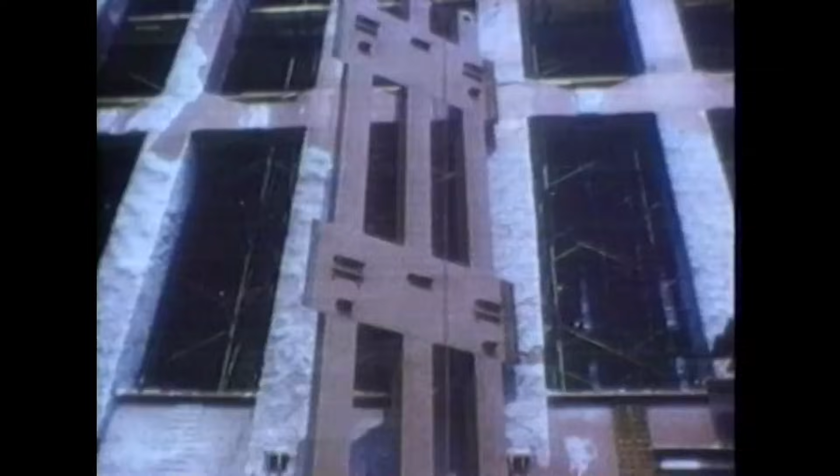Yet in the face of potential disaster, architects continue to design these superstructures higher and higher. It's become a race towards the heavens to lay claim to the title, tallest building in the world. How far and how high will this never-ending race take us? And what engineering marvels keep these superstructures standing?

In Nagoya, Japan, despite continual rainstorms, work progresses on one of the world's largest skyscrapers. The JR Central Towers, still in its infancy, is being built in the middle of a crowded city and on top of a busy train station. Every facet of modern engineering skill is daily put to the test.

When completed, this enormous skyscraper will encompass over 4.5 million square feet. It's about the size of the Pentagon, or larger than one tower of the World Trade Center, the Twin Towers, and one of the largest buildings in Japan, if not the world. Engineers in Nagoya, like many throughout Japan, have no choice but to build up. Land is scarce, and real estate prices are soaring. To meet the needs of a growing population, skyscrapers are the only answer.

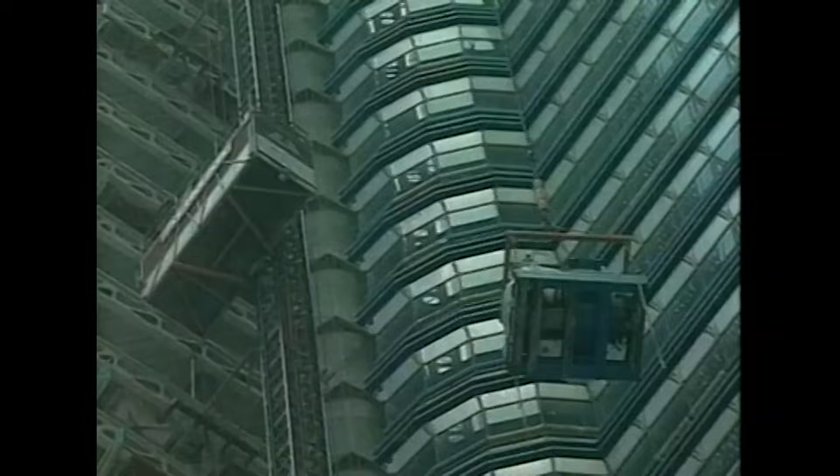Whether built out of need or inspiration, constructing these mammoth skyscrapers relies heavily upon technological advances. But modern science isn't perfect, and tragedy follows when one comes tumbling down.

Unwavering before such catastrophes, engineers continue to build bigger and taller superstructures. Well, I think man has always wanted to get higher and higher. He always climbed the mountain to see beyond. It's also getting up to be taller, to overlook everyone else, or to be recognized or to feel more powerful.

To build these modern-day monoliths, architects and engineers first had to conquer the force of gravity. During the mid-1800s, the only means of vertical transportation, other than climbing stairs, was a rope and pulley system driven by a steam engine. However, the system was too dangerous for passengers since the ropes often broke.

Frustrated, Elisha Otis invented a safety brake that locks the platform to its guides. In 1852, what seems a minor invention paves the way for the modern elevator. Slowly, the public begins to trust the Otis elevator. Upper-level floors become fashionable and profitable as architects quickly adopt this new means of vertical transportation.

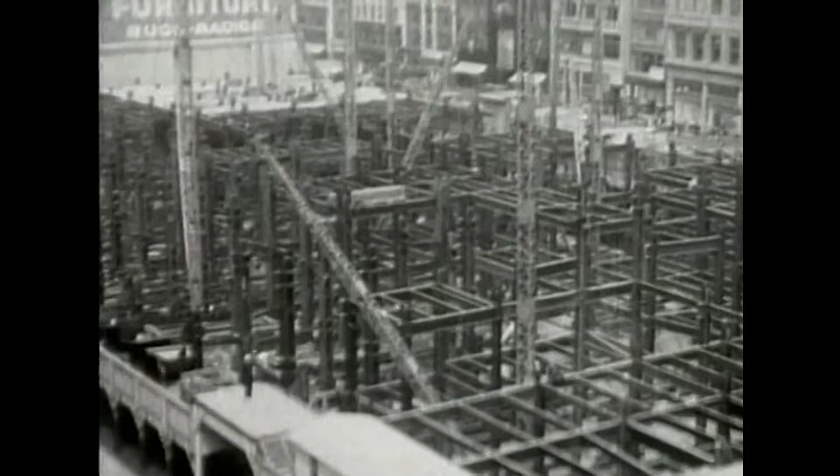And then the weight of that material is held at each floor level rather than passed all the way down 5, 10, 20, 30 stories down to the ground and held at the bottom floor. No, it's all hung off of this very strong structural cage, which is much lighter now because it's out of steel. Because the steel structure bears the majority of the weight, the exterior, or skin of the building, can now be made of much lighter materials, such as glass and aluminum. The result is an explosion of buildings taller than anyone has ever seen.

The limits on masonry buildings were about 200 to 250 feet, which is equivalent to about 20 stories. With the advent of the separation of the two systems, the skeleton from the skin, we became capable of pushing higher and much higher, up to 50, 70, 80, or the Empire State Building type, up to 100. For over 100 years, the steel cage structure has enabled engineers to build skyscrapers higher and higher. It's the backbone of every tall building's design, even the 800-foot JR Central Towers in Nagoya.

The skyscraper is made up of 3 steel cages. One forms the base of the building, while 2 rise up within each tower. Without this technology, skyscrapers rising above 20 stories wouldn't be possible. In Malaysia, over 26,000 tons of steel and 160,000 cubic meters of concrete have been used in the framing of the Twin Towers. These 88-story steel and concrete skeletons will help the Petronas Towers claim the title, tallest building in the world.

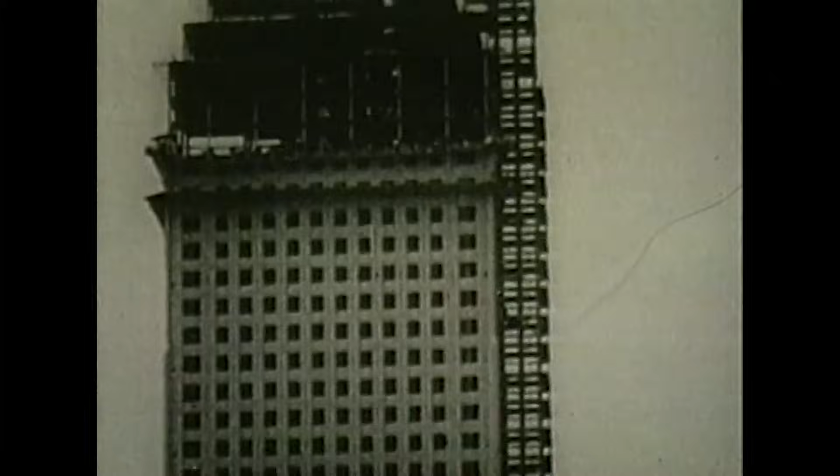Higher and higher they rise. But at what altitude do skyscrapers become too dangerous? Over 50 years ago, a deadly incident magnified these risks. In 1945, the tallest building in the world is New York's Empire State Building, rising an incredible 1,250 feet. Built in just over 13 months, its claim as the tallest skyscraper will last nearly 40 years. Perhaps this building's greatest achievement is not its long stay at the top, but its jarring reminder of the dangers of building so high.

The Empire State Building and all New York City were wrapped in fog as a B-25 Mitchell bomber trying to reach a nearby airport crashed into the tallest structure in the world. Although the pilot and 13 others died, the building sustained little damage and was open for business 2 days later. Its ability to survive a collision with a World War II bomber seemed to validate modern engineering technology. Soon, a skyscraper building boom swept across the United States. 29 years later, the Sears Tower is built 1,454 feet above Chicago, becoming the tallest skyscraper in the world.

While skyscraper construction within the United States has steadily declined since the early 1970s, the JR Central Towers and the Petronas Towers are at the forefront of a building boom along the Pacific Rim. The competition is as fierce as ever. You built a skyscraper, they're taller and taller. Some of them make absolutely no economic sense, but they're being built nonetheless.

Only time will tell if this architectural pursuit will prove deadly. In New York, to avoid future collisions, airplanes were simply rerouted. But the engineers of the JR Central Towers and the Petronas Towers are threatened by unavoidable forces.

They're building skyscrapers in one of the most seismic active regions in the world, where the threat of a major earthquake is constant.

Relying on the innovative designs that enabled the Sears Tower and the Empire State Building to reach such monumental heights won't help. They weren't designed with earthquakes in mind. How safe will these new structures be when a violent earthquake shakes their very foundations?

As construction continues on the JR Central Towers, the Petronas Towers nears completion. Engineers of both buildings hope their state-of-the-art technology will pass the test. If it fails, these latest additions to the tallest buildings in the world could come tumbling down. Modern building design will be pushed to its limits when Mother Nature strikes.

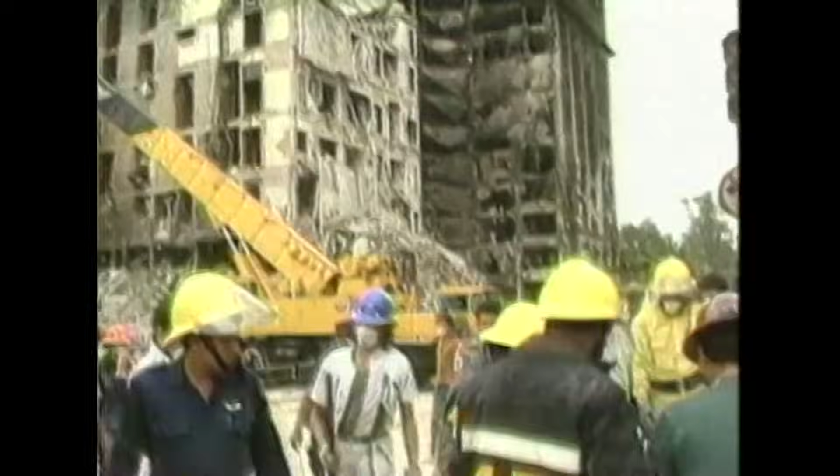More than 10,000 people are killed, and over 100,000 are left homeless as the quake damages nearly 3,000 structures. 400 totally collapse. And for the city's towering skyscrapers, once a symbol of modern Mexico, this is the most devastating quake ever.

The ground was actually moving back and forth for a minute and a half or so, about like this. It's just sort of a gentle motion back and forth, and certainly most buildings, if you were in them, you'd get a little seasick, but you wouldn't feel very much. That's not a very violent motion, unless you happen to be a tall building.

During the 90 seconds of shaking in Mexico City, some skyscrapers swayed 6 feet, 3 times farther than what is considered safe. Neighboring buildings slammed into each other, causing major damage.

10 years later, a small office in the Japanese city of Kobe is tossed upside down, just one of the many casualties in a town devastated by a 7.2 earthquake. Over 100,000 buildings are destroyed, and another 80,000 are severely damaged.

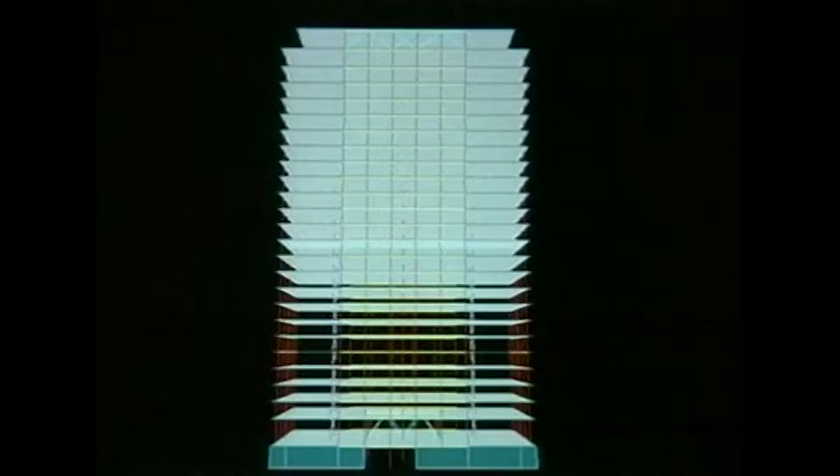Using computers to simulate the shaking a building sustains during a major earthquake, researchers discovered that strengthening a skyscraper's foundation may prevent these structural failures. In Nagoya, Japan, only 140 miles from Kobe, the engineers of the JR Central Towers are putting this latest research to the test.

Four stories below the proposed lobby, a vast digging campaign is underway. In this subterranean cavern, architect Paul Katz hopes to build the strongest foundation ever constructed for a skyscraper.

To anchor the building to the foundation, engineers drive 125-foot-high steel beams 60 feet into the bedrock. Eventually, these columns will be encased in steel reinforcement bars and concrete. This will become the base frame of the building and bear the majority of its weight.

You can see here the tremendous amount of reinforcement that is needed not only to carry the weight of the building, but this is where all the forces of the building come down. And in earthquakes, this is the part of the building that resists the lateral shaking that an earthquake will affect on a huge structure like this.

As an added precaution, engineers will fill the entire cavern with over 1.5 million cubic feet of concrete, creating what is called a mat slab foundation. What we're seeing in the excavation here will entirely be filled with concrete, 5.5 meters in height, which in a way the whole building then floats on, helping support the building from tilting and unifying the entire structure.

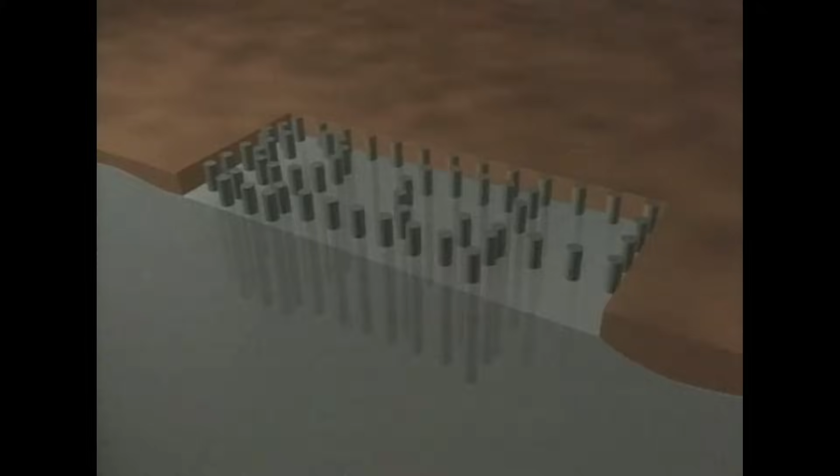For a mat slab foundation to work, steel piles must be anchored in solid bedrock. Once in place, they're locked together into a stronger structure by the cement slab poured around them. Finally, the steel structure of the skyscraper above ground is bolted to the foundation piles below. This becomes the skyscraper's skeleton, a single rigid structure anchored by a cement slab able to absorb most of an earthquake's lateral force. The mat slab foundation prevents the steel cage structure above ground from swaying too far during an earthquake.

The taller the building, the larger the foundation necessary. Because of the limited space surrounding the skyscraper, the JR Central Towers foundation is forced to be excavated in an underground cavern, while the Petronas Towers foundation will spread out, covering over 1.5 acres. The building that will become the tallest skyscraper in the world requires one of the largest mat slab foundations ever constructed.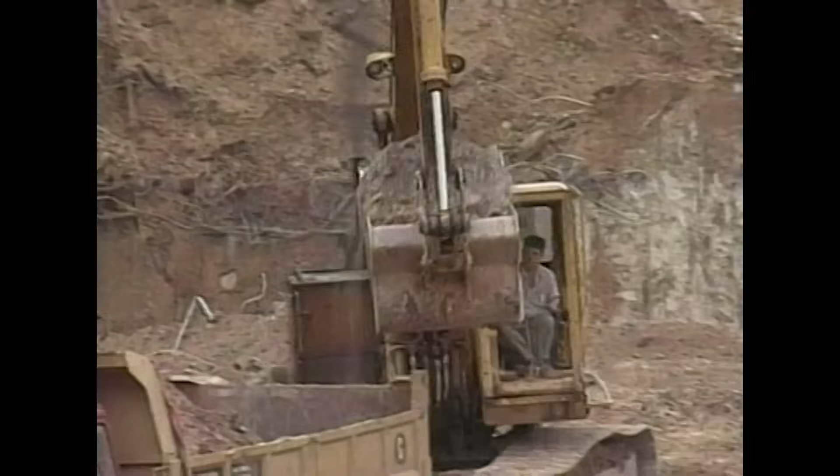Before a drop of concrete is poured, the bedrock at the proposed site of the twin giants becomes an issue of concern for architect Cesar Pelli. 'You need to go down to bedrock, and you had to go very deep to start finding limestone. And the limestone that we found was like Swiss cheese.' This fissured limestone requires drilling the building's foundation piles extraordinarily deep, over 400 feet underground, more than six times the depth needed to build the JR Central Towers.

Once the foundation piles are in, over 70,000 tons of concrete are cast into the mat slab. Pouring round the clock, the work continues for three straight days. This was the largest single pour of concrete ever done.

Timing and precision of the pour must be perfect. If one side of the foundation were to dry and settle before the entire job is completed, an uneven base would result. If the skyscraper were built on an uneven base, the building's weight distribution would be uneven. Out of balance, an earthquake could easily bring it tumbling down.

But will these enormous mat slab foundations safeguard the buildings during a major earthquake? Or could they still topple to the ground, as in Mexico City and Kobe? 'Eventually we'll see an earthquake in a major city that's a very large earthquake, and I think the bad news is that we could see some severe unanticipated damage, and perhaps even collapse of some tall buildings.'

The JR Central Towers, soon to be Japan's tallest building, is designed to withstand a magnitude 8.0 earthquake. Its engineers believe the skyscraper is safe, built to withstand the types of earthquakes that frequently strike the island nation. A similar faith in building design has guided engineers in Los Angeles for years.

On January 17, 1994, when a magnitude 6.7 earthquake strikes Southern California, their faith is shattered. In some areas, engineering fails and structures crumble. Amazingly, none of LA's skyscrapers collapsed. But an inspection of their inner steel cage frames reveals major damage in the welds connecting the vertical columns of many buildings to their horizontal beams.

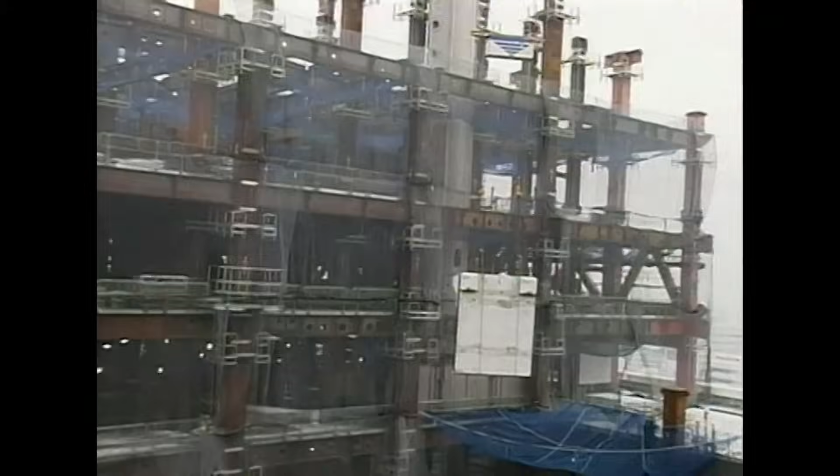While Los Angeles struggles to repair its damaged skyscrapers, the sobering news has sent shockwaves throughout the engineering world. The steel cage structure, once thought safe, is now vulnerable during a strong earthquake. Engineers of the JR Central Towers and the Petronas Towers must now implement the latest technology to keep their skyscrapers upright, to safeguard the millions of people who use Nagoya Station under the JR Central Towers, and to keep the Petronas Towers as the tallest building in the world.

In the aftermath of the Northridge earthquake in Southern California, tall building engineers have answered a troubling question. After years of research, a possible solution exists for the stress-induced failures that many buildings sustain during earthquakes.

Skyscrapers all over the world, including the JR Central Towers in Nagoya, now use what's known as dampers. These devices, installed within the diagonal trusses of the steel cage structure, reduce the building's shaking during a quake, much like shock absorbers in a car.

If you put a brace diagonally across the frame, as you deform it, that element would shorten and lengthen. And so if in that brace you actually put a damper, some sort of hydraulic valve, then it would absorb energy as it lengthened and shortened.

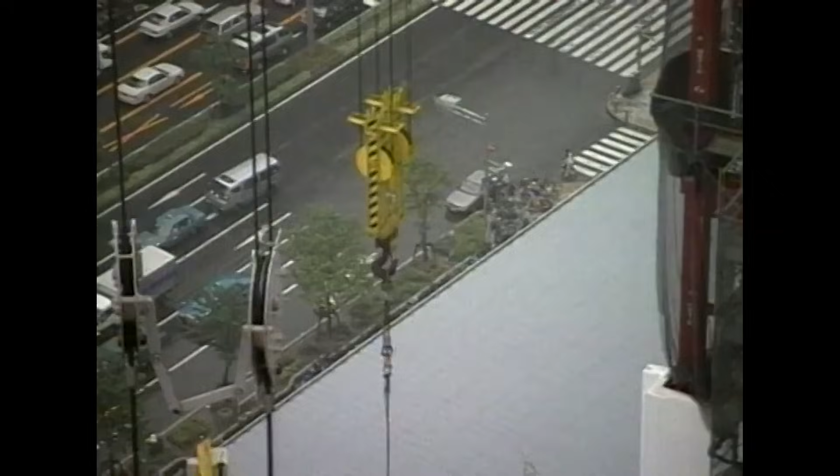Tall building engineers have been quick to adopt the damper technology. 14 have been installed within Petronas Twin Towers, and 6 are being installed in the JR Central Towers. While engineers in Nagoya and Kuala Lumpur incorporate technology to combat potentially destructive earthquakes, another, more immediate danger swirls above.

The wind affects all skyscrapers. The taller a building rises, the stronger the wind it faces. Skyscraper design must take into account these turbulent forces.

Towering over 1,400 feet above Chicago, the Sears Tower sustains daily gusts that can average 75 miles per hour. The wind force, by and large, dominates the design of these very tall buildings. It's more important than the weight of the building in the sense of just holding it up. It is the dominant force. The wind is what drives the design of very tall buildings.

When wind hits a building, it acts much like the sail of a boat. In order to withstand these blustery forces, a tall building must be flexible enough to bend and absorb some of the wind, while still remaining rigid enough not to topple over or even snap in half.

Already, the world record height of these towers has pushed modern technology to its limits. Each tower needs to sway almost 3 feet just to prevent a structural collapse.

But architect Cesar Pelli has a vision that will compound this problem: a bridge between the 2 towers, a structure that Pelli feels will be symbolic of something larger than the towers themselves, the human spirit. 'We proposed the bridge connecting the 2 towers in the 41st and 42nd floors. And the bridge, with its supports, marks a gate also to the sky.'

Pelli's architectural vision clashed with the tower's physical reality. If each tower must sway independently, how can it do so while attached to the bridge? The realization of this dream will stretch both Pelli's and the engineer's skills to their limits. It takes over 30 hours for construction crews to lift the sky bridge into position, but the real danger exists after the 900-ton passageway is locked in place.

What would happen if the swirling winds hit the Twin Towers from different angles simultaneously, and they swayed in different directions? The answer is frighteningly simple. The bridge will snap apart, plummeting over 600 feet onto a crowded walkway below. To solve this unique design problem, engineers borrowed something from earthquake technology: dampers.

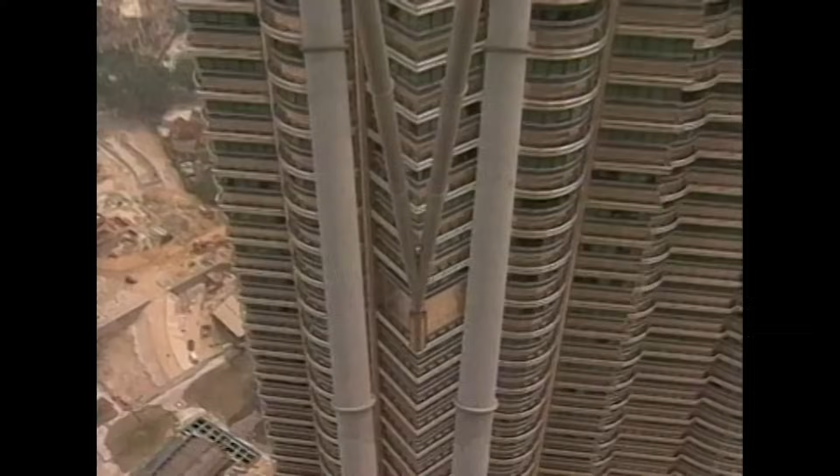Instead of anchoring them to the bridge and towers directly, the support legs are attached to a rotating plate that can twist at least 45 degrees in any direction. The result? The damper legs absorb the torque and sway, while the bridge's interior support system remains unaffected. After the towers open, the bridge will serve not only as a passageway between the two towers, but also as an escape route in case of fires or emergencies.

This combination of artistic design and engineering technology allows Pelli to realize his architectural dream. When I face that space between the towers, I am in direct contact with the sky, with a higher world. Pelli was able to implement his design for the Petronas Towers. Sometimes the forces that can upset plans come from the most unexpected places.

In Japan, where cable television hasn't taken root, most television signals are broadcast through the air. The JR Central Towers, as they're being built today, are round. In the original plan, they were square. However, it became clear that a rectangular tower 800 feet in the air would block transmission signals from local TV stations. The result would be a phenomenon known as TV ghosting.

TV ghosting is a very common phenomenon. If you're looking at your television set and you get two images that blur your reception, that's called TV ghosting. The architects of the JR Central Towers were surprised by this structural problem and forced to make a multi-million-dollar design change or suffer the wrath of thousands of television viewers.

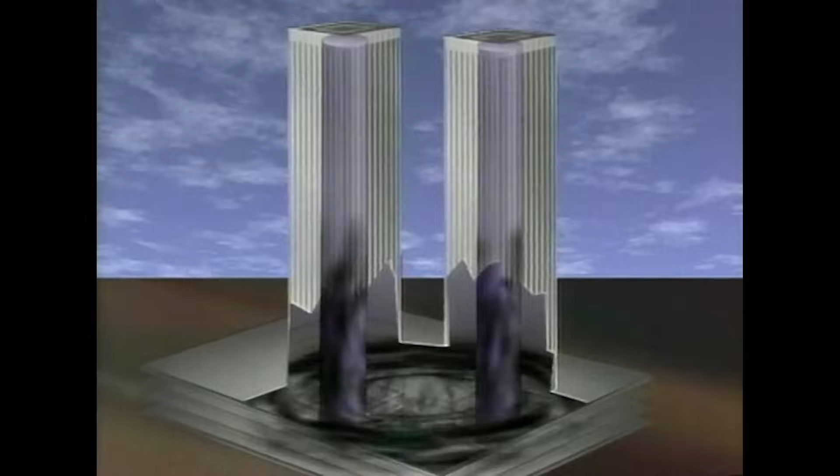The steel cage skeleton absorbed the force of the bomb and prevented its collapse by distributing the blast shock throughout the entire frame. However, the inner concrete reinforced columns, designed to give the towers their rigidity, became the vertical conduits for the deadly fire and smoke. Eventually, firefighters were able to release the trapped smoke by smashing windows on the lower floors and cutting air holes in the roof of the towers.

During the ensuing investigation, engineers discovered the structural design of the World Trade Center can survive a bomb's blast, but the building's emergency fire and sprinkler systems can't. They were knocked offline, allowing the spread of the fire and smoke.

Since the current steel cage structure is essential to building a skyscraper, architects can't change this design component. Yet disasters like the World Trade bombing and the MGM hotel fire of 1980 can turn skyscrapers into towering infernos. Engineers are now challenged with developing an advanced infrastructure to ensure that the air, water, and fire systems can function under extreme situations.

Once again, as architects continue to design skyscrapers higher and higher, engineers struggle to invent new systems to support these record heights. For the engineers of the Petronas Towers, simply providing water to the entire building becomes their biggest obstacle. Over 600 pounds of pressure will be needed to pump water to the pinnacle of this skyscraper, nearly 1,500 feet into the sky. Simply attaching a faucet or sprinkler to such highly pressurized water would be like trying to drink from the end of a firefighter's hose.

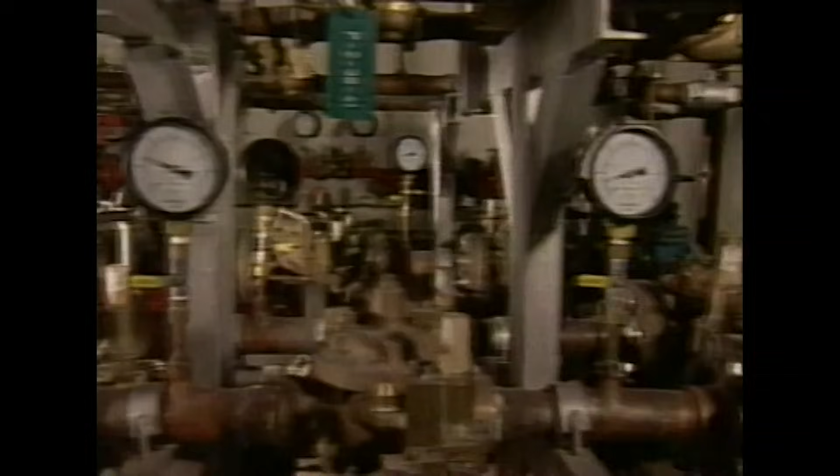If during a fire or explosion one of these maintenance floors is destroyed, the other 2 can operate independently to suppress any fire and ventilate any smoke. During the World Trade Center bombing, once the main control area was knocked offline by the blast, all emergency systems throughout the skyscraper were lost. The 3 independent control areas in the Petronas Towers are designed to avoid just such a fate.

This decentralized plan provides a reliable means to a more comfortable environment for the tenants. You take it for granted that you're cool, you're warm, there's lights on, the bathrooms work, and there's some very, very sophisticated systems in your building, particularly today. These high-tech solutions to old problems have made possible the continued growth of modern skyscrapers. But this technology doesn't come cheap. In Nagoya, Japan, it will take 7 years to complete the JR Central Towers. And it's costing $1 million a day to build this skyscraper.

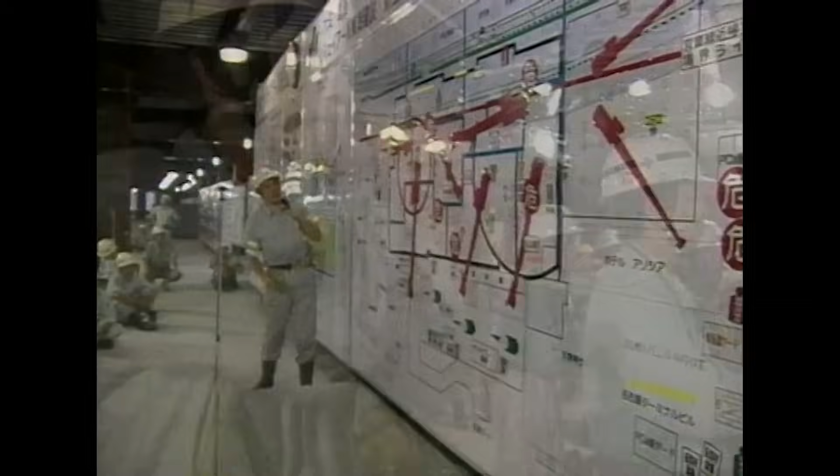But for all the money that's spent, it's the skill of the high steel worker that makes all skyscrapers possible. In Japan, the people who work on these tall buildings are some of the most talented and dedicated workers in the world. At the JR Central Towers, the project is viewed as a team job. Each morning, workers perform calisthenics together. A detailed briefing of precisely what work needs to be completed that day follows. The coordination between departments is so precise that the day's work is planned down to the minute.

The skill of the worker in Japan is at a very high level. They devote their lives to the construction industry. This dedication has paid off for the JR Central Towers. Construction is on schedule and under budget, with workers completing an astonishing 3 floors per week. Elsewhere around the world, the completion of 1 floor per week is acceptable. But for the many workers on the high steel in Nagoya, being average is not acceptable, and their passion is spreading. Japanese engineers and workers often train crews building skyscrapers along the Pacific Rim. They came to Kuala Lumpur, and the results stand before all the world to see.

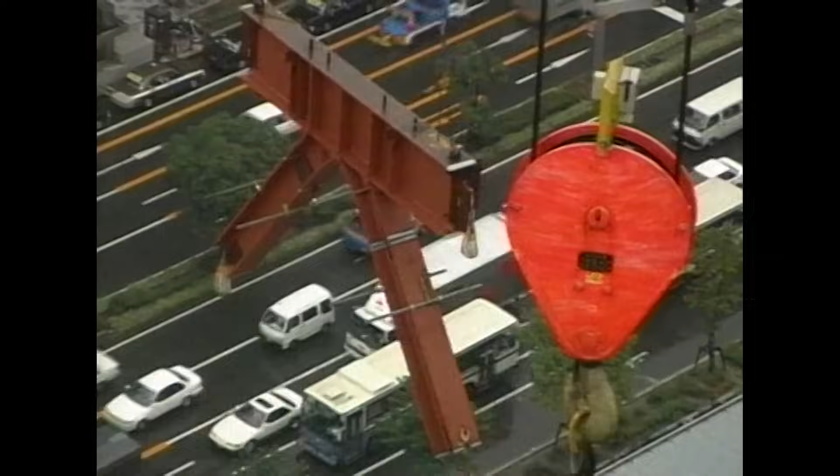Highly skilled workers, technological advances, the dreams of architects. These are the ingredients to build the modern skyscraper. It's guided engineers to build the JR Central Towers 800 feet above a crowded metropolis in the heart of earthquake country. And it's inspired Cesar Pelli to design and erect the tallest building in the world as a monument to a proud city. But in this race to reach new and unimaginable heights, how high is high enough? The drive to create the tallest skyscraper in the world has been a 100-year odyssey sweeping engineers and architects far beyond their initial dreams.

This ambitious race has led Cesar Pelli and the engineers of the Petronas Towers to the forefront of modern building design. The $800 million invested by their builders have made the Petronas Towers the tallest building in the world. Their 88 floors soar 1,483 feet into the air. Or is it?

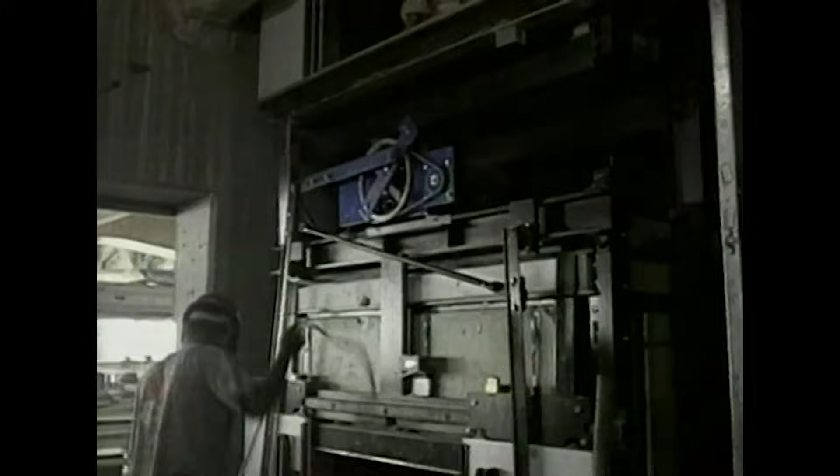Recently, the Otis Company announced its latest creation, which many believe will solve this dilemma. An elevator that can move horizontally as well as vertically. By providing access to more areas of a skyscraper with fewer elevators, valuable rental space is opened up. Once a building becomes economically viable to investors, how long will it take before a higher one is built? And how long before another technological advancement comes along that raises tall buildings to unheard of heights?